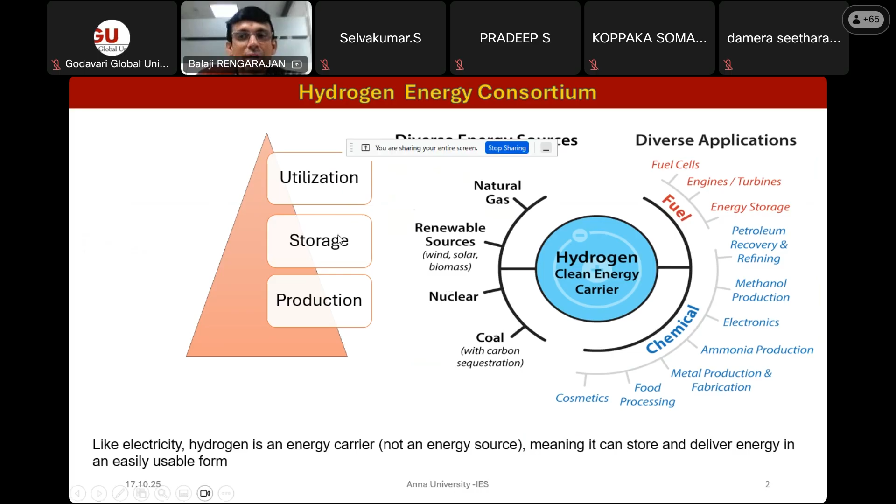Coming to the basic definition of fuel cell - I think most of you are aware of that. As I said, the chemical reaction is 2H2 plus O2, so the combination of hydrogen and oxygen, not directly, but in a controlled manner on the electrode surface. So you can get pure water along with the generation of power.

So it produces electricity through chemical reaction, not through combustion. It operates like a battery, because a battery also produces DC power and a fuel cell also produces DC power. But the main difference is that as long as you feed the fuel cell, it will generate power, whereas in the case of a battery, it's a fixed electric charge stored in the form of materials. Once the material gets exhausted or converted into a different form, the power output will change. Whereas in the case of a fuel cell, as long as you supply fuel, it can generate power through chemical reactions. That is the major difference between a battery and a fuel cell.

So what is a hydrogen fuel cell? Because you can use any fuel, but why do you want to go with hydrogen? Basically, it's an electrochemical cell, and it generates power by reduction of air and oxidation of hydrogen within the cell. There are three important components since it's basically an electrochemical cell - we need to have positive or negative electrodes, that is anode and cathode, and then the electrolyte. These are the three major components of a fuel cell.

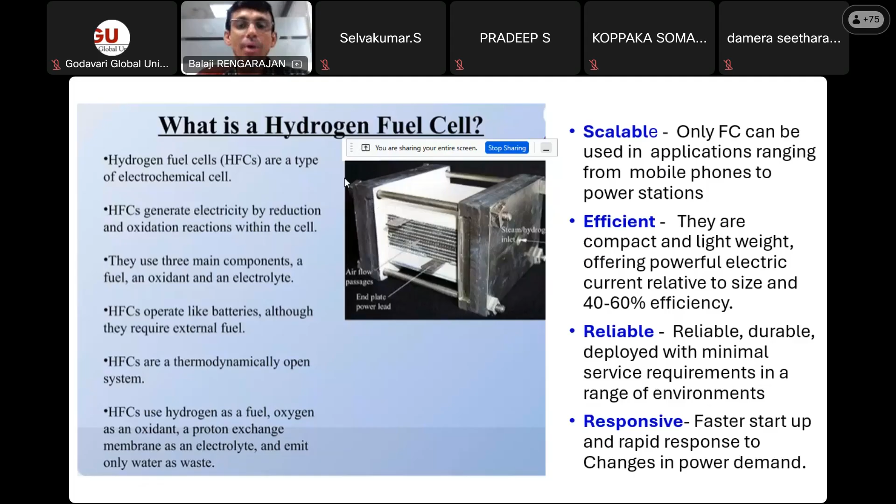The response to electrical signals has to be high when you try to use it for any automobile application. In the case of battery also it's good, and in case of fuel cell also, especially hydrogen fuel cells, it's on par with other energy generation devices. As I said, it's basically an electrochemical cell.

Depending upon the type of electrolyte employed for making a fuel cell, it can be categorized into 5 different types based on the electrolyte used. The second option is based on the type of operation, whether it's low temperature or high temperature operation. In that category also, it can be categorized into 5 different types.

The first one is the proton exchange membrane based fuel cell, which operates at low temperature and can be used for portable to transport applications. In the entire range, we can use it.

In the case of solid oxide fuel cell, because it's a high temperature fuel cell, ion conduction happens through the oxide ion. To carry out conduction of the oxide ion, the material has to be heated to high temperature, so then only the oxide ion conduction will be possible. In this case, the solid oxide fuel cell is operated at high temperature of 1000 degrees Celsius. Because of this high operating temperature, it cannot be used for mobility applications; it can be used only for stationary applications.

Molten carbonate and phosphoric acid salts come under the acid environment, but have medium temperature. They operate less than 1000 degrees Celsius, ranging from 300 to 900 degrees Celsius, and can be used only for generator stationary applications because of the operating temperature range.

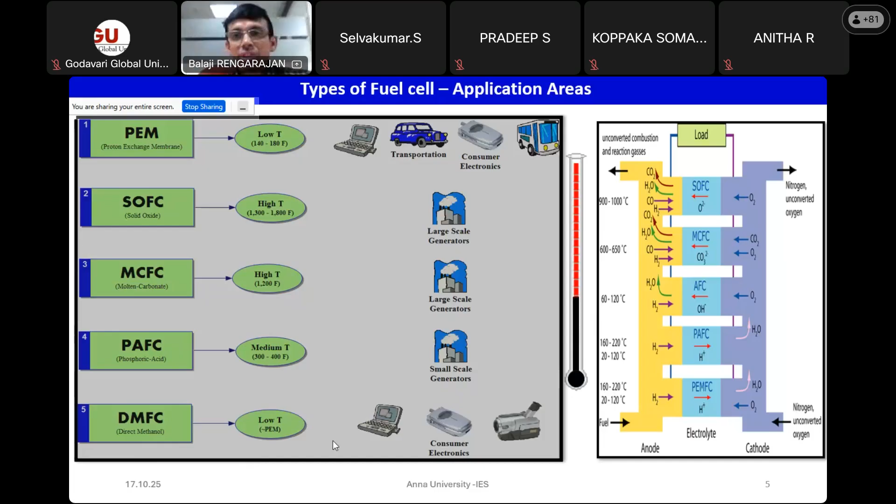The last one is the direct methanol fuel cell, which in situ generates hydrogen from methanol. In a hydrogen fuel cell, you have to pass pure hydrogen gas, whereas in the case of direct methanol fuel cell, you need to use direct methanol as fuel. It can generate hydrogen within the system, and it can also power the system. So this is the direct methanol fuel cell.

Among these 5 fuel cells, why do you want to go with PEM, the proton exchange membrane based fuel cell? The advantage is that it can be scalable, ranging from few watts to megawatt level. That is the advantage, and it can be used both for stationary as well as transport applications, and the operation is at low temperature. Because of these advantages, this polymer electrolyte or proton exchange membrane based fuel cell is gaining importance both for stationary as well as transport applications.

If you see the basic configuration of a fuel cell, you need to have a membrane at the center, and on both sides of the membrane, the catalyst has been coated - one is positive, the other is negative. In order to facilitate the gas at each compartment, you need to have flow channels, which are made on the graphite plate, and this flow channel is determined based on the stoichiometric ratio required for hydrogen and oxygen in the system.

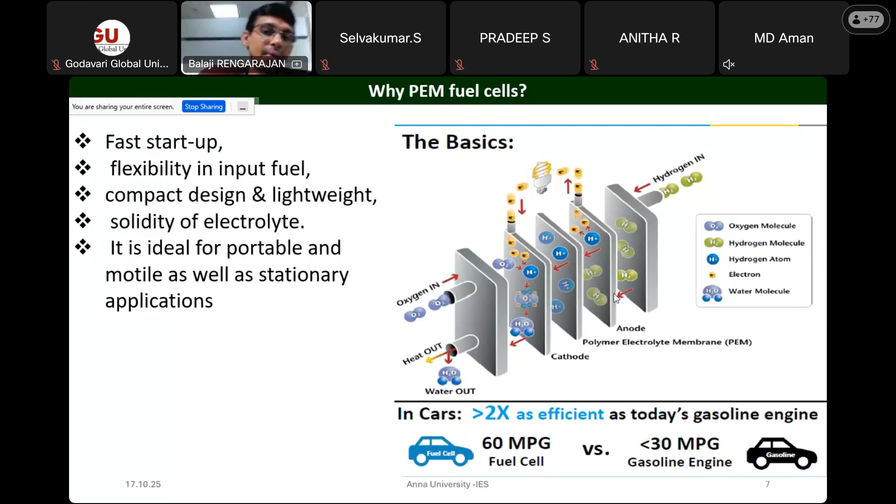This is a typical single PEM fuel cell configuration, and it is lightweight and compactable, because the membrane thickness will be in the range of microns, and you can make a very large stack because this repeating element of membrane and electrodes is very thin, and you can make various modular PEM fuel cells.

Coming to the important components involved in making a proton exchange membrane fuel cell, there are 4 important components. If you see on the right side of the slide, the first is the membrane, called the proton exchange membrane, which is a Teflon backbone based polymer functionalized with the sulfonic acid group. The sulfonic acid group is responsible for proton conduction within the polymer matrix. This is one of the important components in the fuel cell - it acts as an electrolyte-cum-separator.

The next important component is the bipolar plates - actually a separator plate, because this is a graphite based bipolar plate. This graphite has very good electrical conductivity, both in-plane and through-plane conductivity is good, and it has very good thermal conductivity also. Because of these two properties, it is widely used as a bipolar plate for making fuel cell stacks. So on the surface of the bipolar plate, you need to have channels to facilitate the gas molecules in the respective compartment.

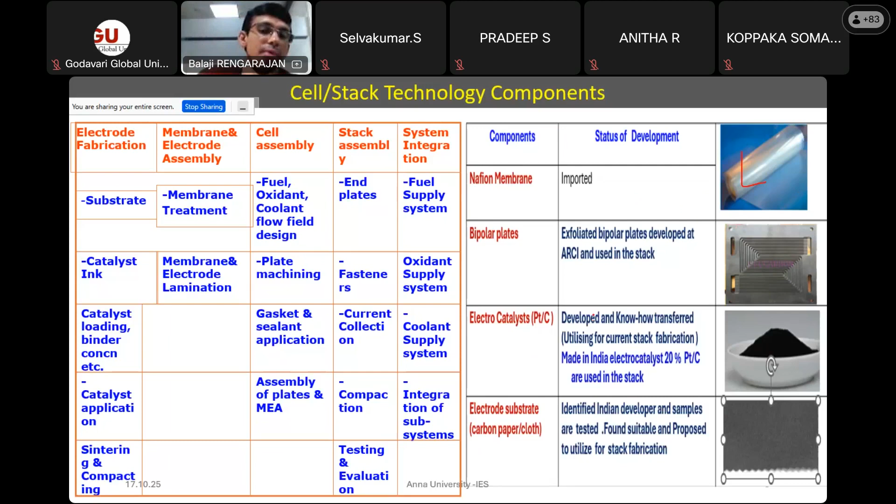So it needs to have hydrophilic and hydrophobic properties, and it should be porous in nature to facilitate the gas molecules. These are the important properties and functions of each component involved in making a PEM fuel cell. If you see these materials, there are four materials.

If you see the thickness of each material, the electrolyte ranges from 20 to 180 microns. It's a very thin polymer film, and over this polymer film the catalyst has been directly coated. This platinum-carbon is directly coated on the membrane on both sides, and you have a carbon substrate, that is carbon cloth or carbon paper, which acts as a gas diffusion medium.

It is completely porous. It will facilitate the gas molecule reaching the cathode and the electrode surface. So in order to facilitate the gas molecules, you need to have a separator plate, that is a graphite plate, the gas distribution plate or gas distribution cathode, called a bipolar plate, ranging from 200 to 700 microns thickness. It's mostly made up of graphite, and it has a desired flow channel to facilitate the gas molecule in the respective compartment.

So these are the four important layers of the PEM fuel cell. And if you want multiple cells, this unit is repeated simultaneously to get the required power from the fuel cell.

Now in terms of the lifetime of the fuel cell, when you want to make a fuel cell and ascertain its life, the various phenomena happening within the fuel cell are most important. These phenomena happen on a time scale of microseconds to months. Each phenomenon will decide the life of the fuel cell.

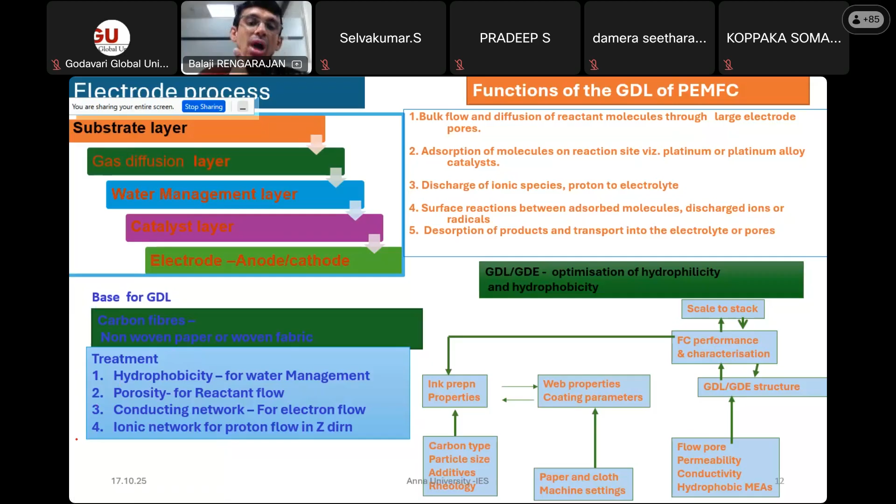Another important component is the membrane. There is a proton exchange membrane, basically a Teflon polymer, polytetrafluoroethylene (PTFE). That is a Teflon-based polymer backbone functionalized with sulfonic acid groups, which allows proton ion conduction between the two positive and negative electrodes.

The main property of this membrane is that it should be highly mechanically stable. Though the thickness is in the micron range, it should still be mechanically stable. Otherwise, if any pinhole formation happens within the membrane, it would allow hydrogen and oxygen molecules to directly combine. So it should be highly mechanically stable, and in terms of thermal stability, it should be stable up to 100 degrees Celsius, both physically and thermally.

In terms of conductivity, it should have zero electronic conductivity — it should not allow electrons to pass through the membrane. But at the same time, it should be highly ionic conductive because proton conduction has to take place through the membrane.

And then low gas permeability, because you are handling two different gases in two compartments, it should be completely free from gas permeation — not allowing any gas to pass to either side of the membrane. In terms of long-term stability, it should be highly stable because the proton conduction should always be stable; only then can you get stable performance over a period of time.

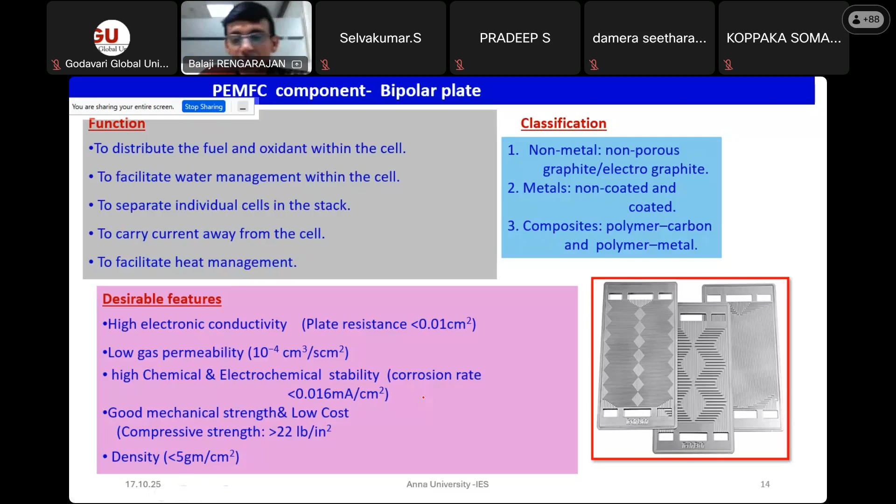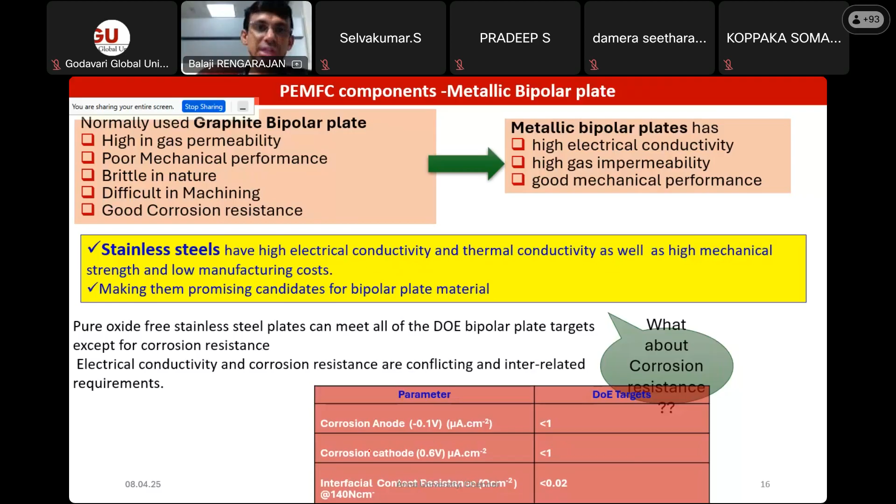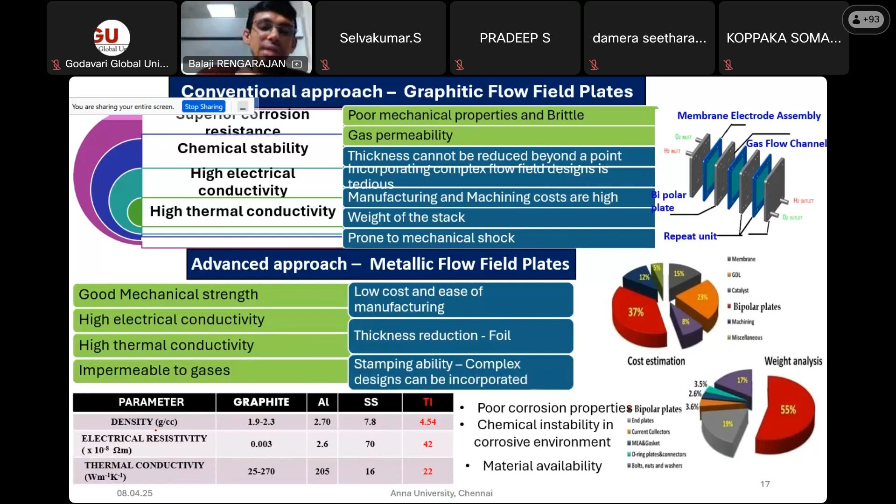Conventionally graphite was used, but now people are trying to use metallic flow field plates with desired properties of electrical and thermal conductivity, and the corrosion property has to be minimum.

But even if you use a very thin plate, the challenge is how you can make a desired flow channel. When you employ a very thin metal plate, like 1mm or less than 0.1mm or 0.2mm, you cannot do conventional milling over the metallic plate - it creates a lot of bending, and ultimately you will not get planarity on the plate to make an entire PEM stack.

So there are various strategies to make a desired flow channel on the metallic plate, ranging from conventional stamping - you have a die with the desired flow channel and do hydraulic stamping to get the desired flow channel on the plate - or hydroforming, which is also an industrially proven technology to make a desired channel on the plate.

Additive manufacturing, like 3D printing, can also be employed for making a desired flow channel. Chemical etching involves proper masking on the plate, then chemically etching only the unmasked area with a desired flow channel - this is also one way of making the metallic bipolar plate. And conventional milling, which is an energy-intensive and time-consuming process.

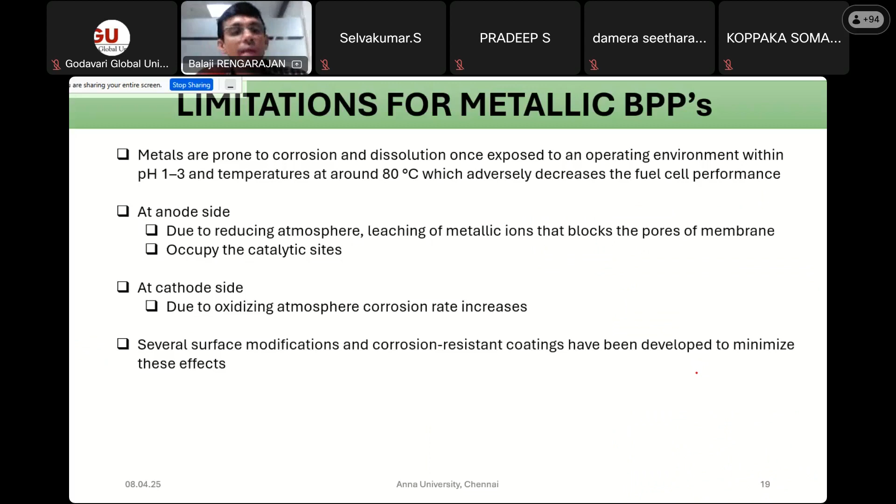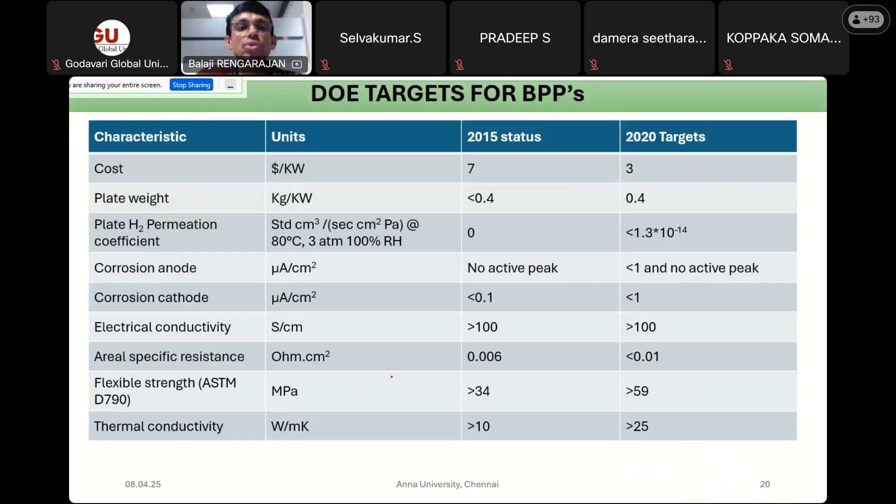So as I said, one limitation of metallic plates is undergoing corrosion - we need a proper coating to avoid corrosion in the acidic environment. These are the various target values of metallic bipolar plates in terms of cost, weight, and corrosion properties, and I can share these slides so you can go through the target values if you want to employ them in a fuel cell.

Especially stainless steel, as I said, is widely used as a metallic bipolar plate in fuel cells with a proper protective coating. That protective coating is adopted through various deposition methods like physical vapor deposition, arc ion plating, thermal nitridation, or sol-gel. Various coating methodologies have been adopted to make a desired coating over the SS to protect the base material from corrosion.

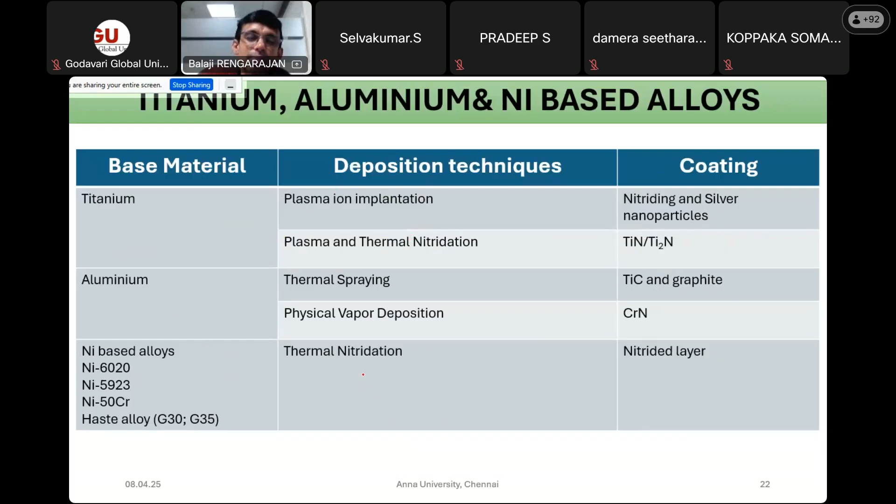Titanium, aluminum, or nickel-based alloys can also be used as base material, but these are not widely considered because of cost, and there are technical challenges with aluminum when you want to employ it in a fuel cell - its corrosion stability is not as great as SS. So SS-based metallic bipolar plates are widely used for fuel cell applications.

So coming to the various phenomena happening within the fuel cell, apart from the component level we discussed, the next aspect is the kind of phenomena - what is happening within the fuel cell. So the first step is water management.

The membrane and the conduction of protons will be effective only if the membrane is fully hydrated. Water is always being produced at the cathode compartment. But if you don't properly eliminate the water from the cell, it creates flooding at the cathode side, and it will not allow fresh hydrogen or air molecules to reach the catalyst surface. So you have to take out the water as soon as it gets produced within the cell, and you need proper water management within the cell.

To have proper water management within the cell, you have to make hydrophilic and hydrophobic coatings over the component surfaces, so that you can maintain some water within the system to keep the membrane always hydrated. But at the same time, 90% of the water produced from the cell has to be evacuated. So you need proper water management to have a stable and reliable performance over time of the fuel cell.

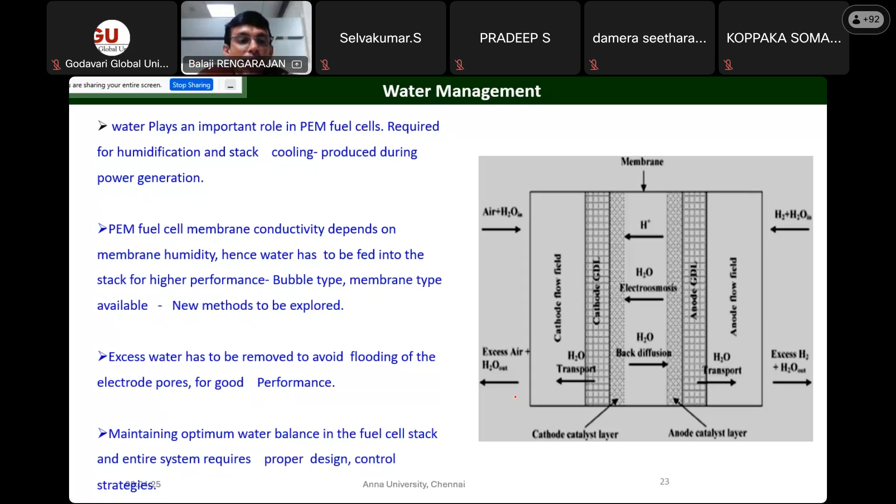Regarding thermal management: for example, if you develop a 1 kilowatt fuel cell delivering 1 kilowatt of electrical power, it is also producing 1 kilowatt of heat, because the open circuit voltage is 1. The moment you draw the load, the voltage comes down. If you operate at 0.5 or 0.6 volts, the efficiency is close to 50 to 60%, so the remaining 40% of the energy is converted into heat energy. So heat is also produced during the operation of the fuel cell.

So as I said, 50% of the energy comes out as heat, and 50% comes out as electrical power. This heat has to be managed properly with a proper cooling mechanism.

Normally, in a PEM fuel cell stack, people introduce a coolant plate with a desired flow channel in between the cells. For example, in between 3 to 4 cells or 2 to 3 cells, they introduce a coolant plate with a desired flow channel, which facilitates water or air as the coolant, and it carries the produced heat away from the fuel cell.

When you want an effective thermal management system, a closed loop cooling mechanism is preferred. You need a proper radiator with a closed loop mechanism, and you can effectively maintain the PEM fuel cell stack at a desired temperature of 50 to 70 degrees Celsius.

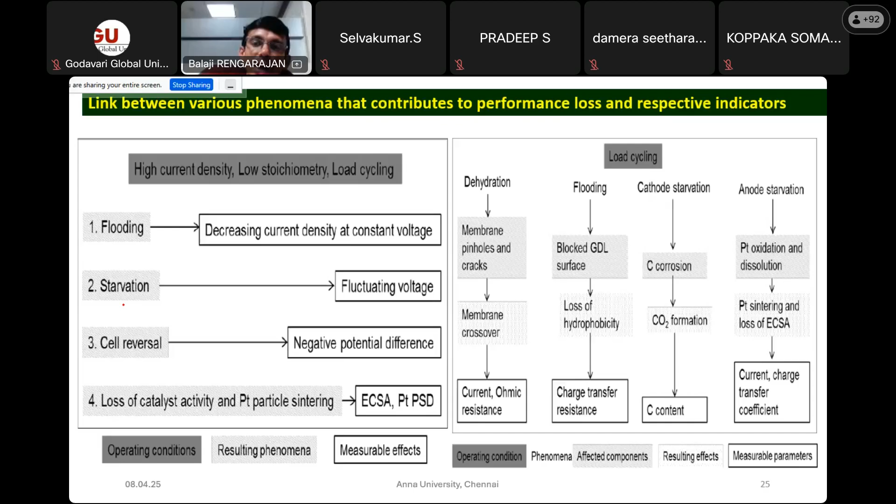Finally, the loss of catalyst activity over a period of time. How do we lose catalyst activity? Because we use very nanomaterials and micron range materials, over a period of time these nanomaterials can combine together and form a bulk material. If bulk material forms, then obviously the electrochemical active surface area will come down, so overall catalyst activity will also come down. So all these four phenomena result in lower performance over the long run.

Coming to the power converter aspect, because fuel cell will produce DC power, when you want to convert it into AC you normally need to introduce a power conditioner, so you introduce converters and inverters. And when you want to call it a PEM fuel cell system, it not only means the fuel cell, it also represents the air supply system, fuel supply system, power conditioner, and the entire control and monitoring system. All together is essential if you want to make a PEM fuel cell system.

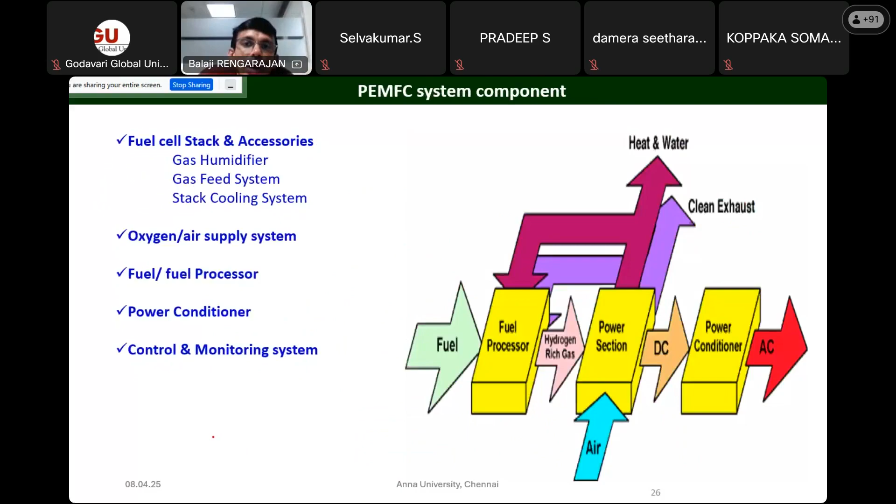In terms of power management, the critical aspect of the fuel cell is that though it is a DC power producing device like a battery, it is entirely different from the battery. The power electronics are entirely different, because for the battery, the power electronics required is to meet the operation of high voltage and low current, whereas in the case of fuel cell, you need power controllers and power electronics that can handle high current and low voltage.

Each fuel cell will produce 1 volt as open circuit voltage. The moment you draw current, in 1 centimeter squared area you can draw maximum of 1 to 2 amps, and this 1 to 2 amps has to be handled at 0.5 to 0.6 volt, a very low voltage. If you have 100 cells in series, the voltage multiple is close to 50 to 60 volts, but the current, if you have 100 or 300 centimeter squared area, you need to handle 50 volts at 300 amps or something like that.

So you need to be in a position to develop power electronics which can handle high current at low voltage, not high voltage and low current. The power electronics is also playing a major role in getting stable power from the fuel cell.

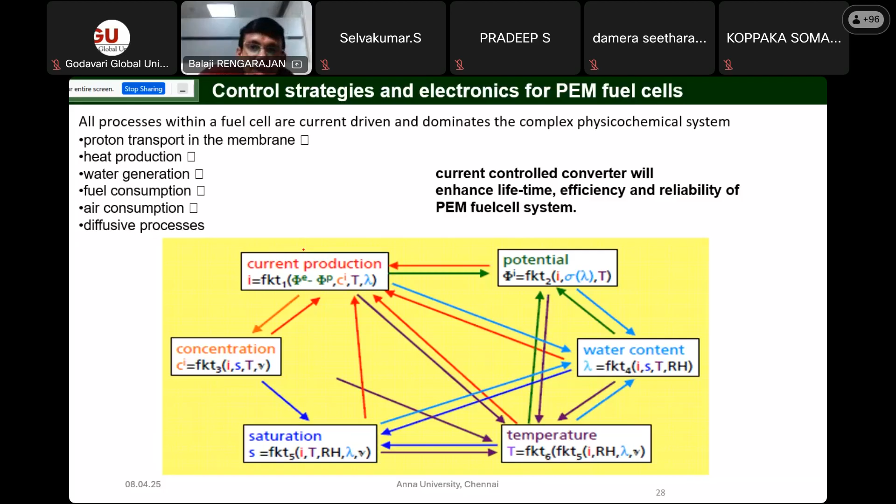And we start to make a component like a catalyst coated membrane and membrane electrode assembly and bipolar plates. We make a component from the raw material, commercial raw materials, and we make a short stack and full stack.

Once the stack is ready, we develop the balance of system - air supply, fuel supply system, thermal management, power management, coolant management. We integrate all this with the fuel cell stack to make a product that has been employed for various field trials. That is one pathway mechanism.

The second parallel pathway is that we develop our own materials, not commercial raw materials, and evaluate them at a common level. Once successful, we make a small single cell and compare its performance with commercial materials. If it's on par with the commercial membrane, we scale up our R&D activities to the system level. This is our two-way pathway mechanism for technological development.

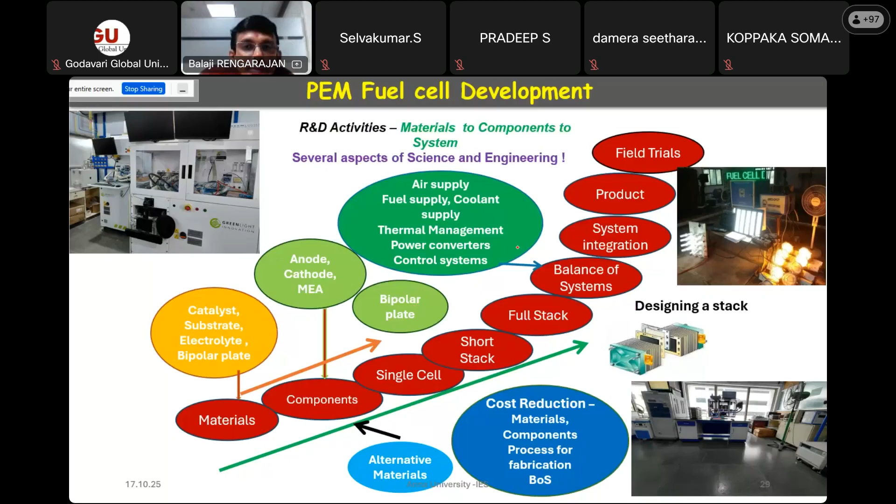This is our journey of developing various fuel cell complete grid-independent power supply systems, ranging from 1 kilowatt to 20 kilowatt capacity, with all the required balance of system, over a period of time.

Whatever system we develop, we normally employ it wherever hydrogen is available. We put up our hydrogen system there and monitor the actual performance of the fuel cell system we develop.

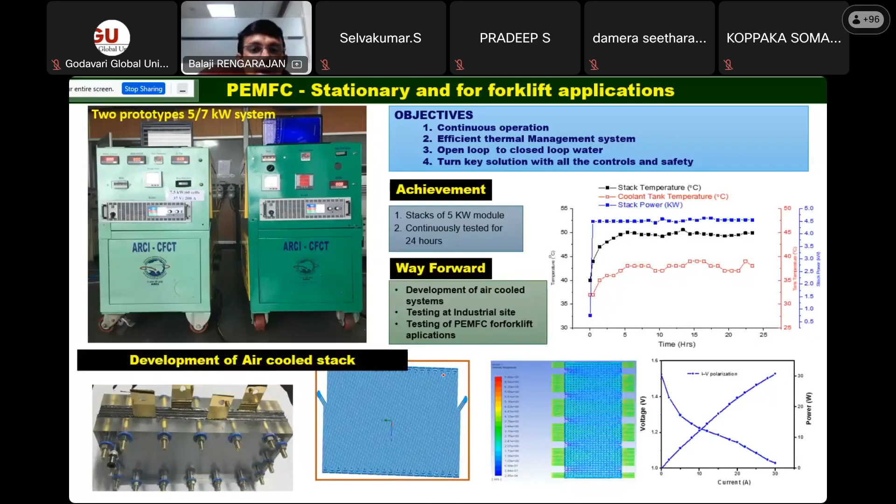Apart from that, we tried to demonstrate a kind of hydrogen truck, where a diesel truck is converted to have an inbuilt PEM fuel cell system along with hydrogen gas cylinders. So we have hydrogen gas cylinders and a fuel cell in the vehicle.

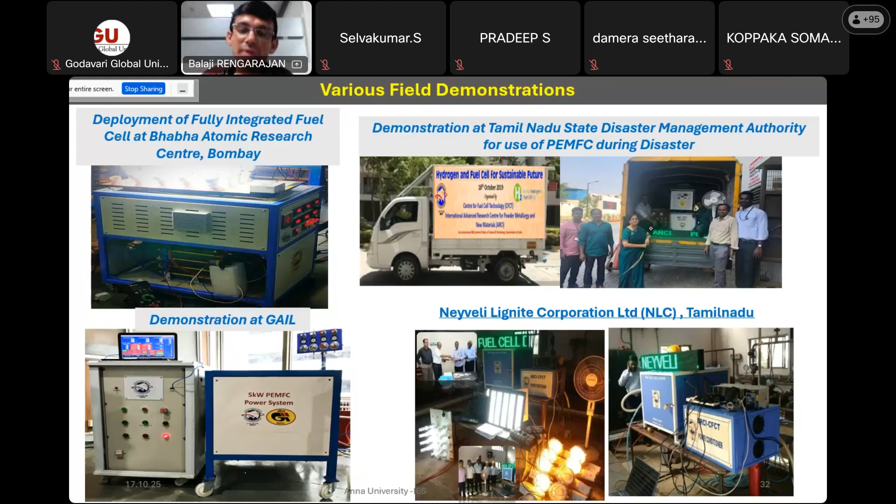Whenever disaster management is needed, such as floods, and immediate power is required, this truck can power and meet the required power demand. As a proof of concept with the Tamil Nadu government, we did a disaster management demonstration with our 5 kilowatt fuel cell system, which can power a maximum of 5 to 7 kilowatts to meet the immediate power demand.

Apart from stationary applications, nowadays PEM fuel cells are being considered for power backup applications for telecom towers, because telecom towers mostly depend on the grid. When the grid fails, they need a mechanism to handle that failure, and diesel gensets are normally employed in various telecom towers. But government regulations are pushing them toward the non-carbon route, that is the fuel cell route.

So we approached an Airtel telecom tower in Pune and demonstrated our fuel cell system as a backup power application whenever grid power fails. Our PEM fuel cell will power the telecom tower in the absence of grid power. That was a decent demonstration, and many telecom tower operators are looking for alternative backup power applications.

So hydrogen fuel cells are also one of the power backup application options, and many data centers are also looking for immediate application of fuel cells for telecom towers as a stationary backup power application.

As I said, when you want to make a fuel cell stack, it requires starting from materials - the material has to be processed, assembled, and delivered as a fuel cell stack. The entire process involves about 45 steps to make a fuel cell stack. Earlier we automated about 30% of these process steps. Now we try to maximize automation in fuel cell component as well as stack fabrication steps.

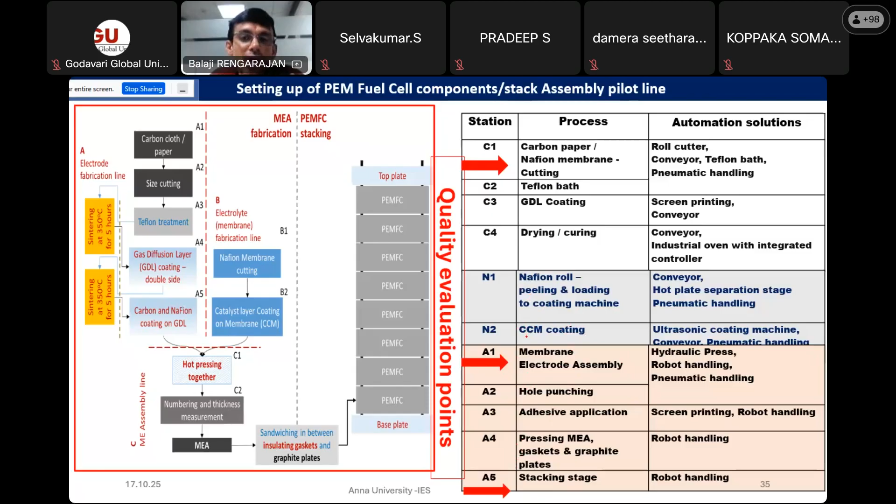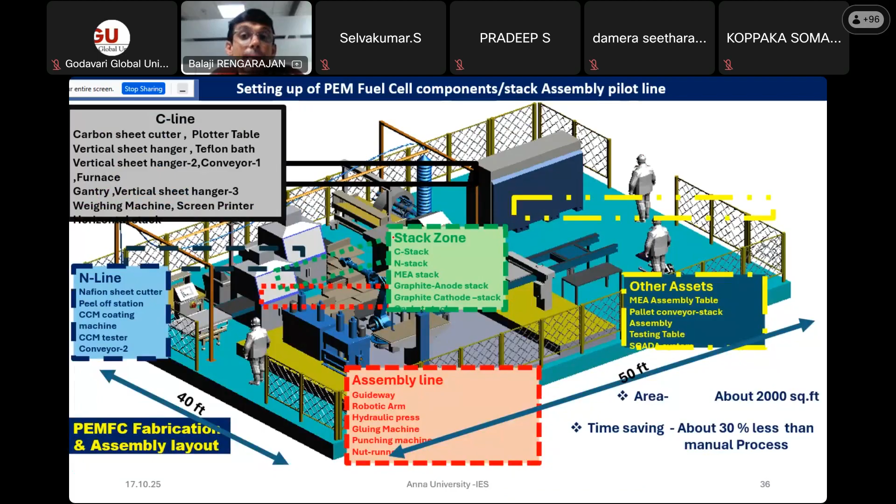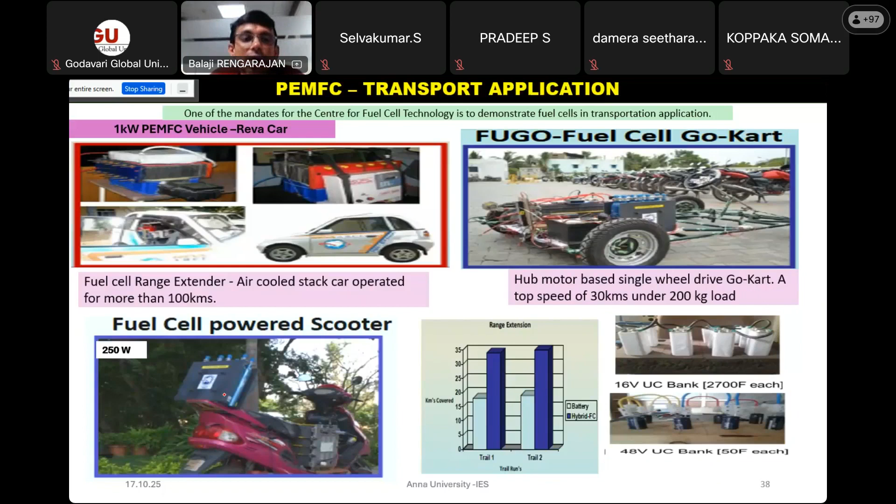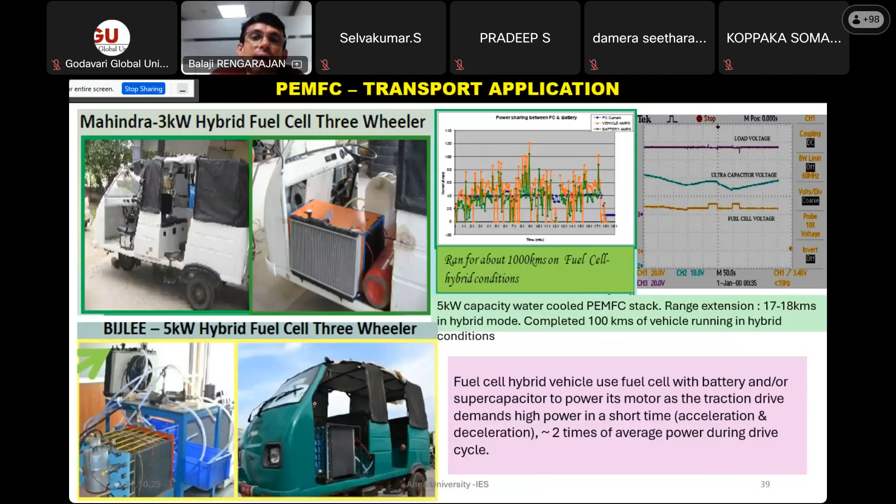Coming to stationary applications, and apart from stationary, in terms of transport applications, whatever stack we fabricated within our lab, we tried to integrate with a battery as a kind of range extender. So we did a demonstration for the two-wheeler as well as go-kart, and for the four-wheeler also, with a battery as a range extender. We did a lot of trials in our premises, and it shows the feasibility of integrating with the battery, which can also be used as hybrid vehicles with our own fuel cell.

Apart from converting hydrogen into power through a fuel cell, an ICE engine can also be used to convert hydrogen to power. But the challenge is that the air fuel ratio is more with hydrogen gas, since it occupies more volume in the combustion zone, and there may be a possibility for NOx emissions, which is higher than fossil fuel based engines. So we need to take care of NOx emissions when employing a hydrogen ICE engine, and the efficiency is not on par with the fuel cell. It's low efficiency, close to 25 to 30%, not the 40 to 50% we are getting in fuel cells.

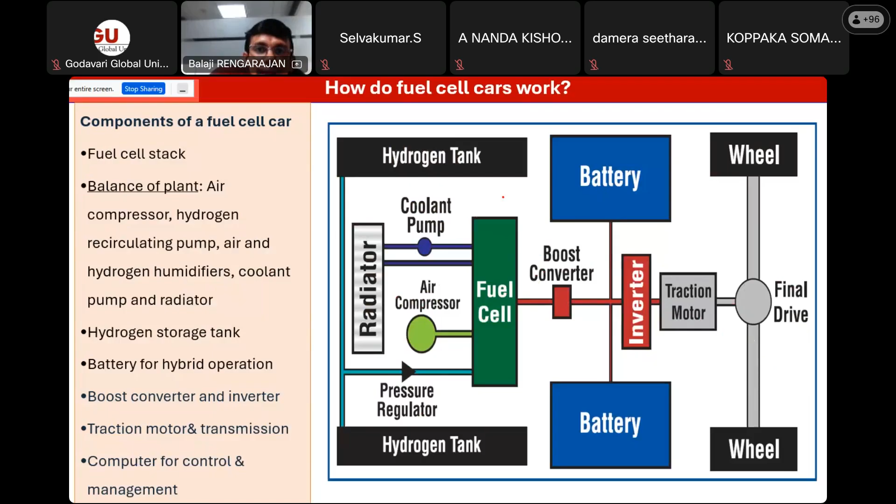Normally the fuel cell car works in such a way that you will have a battery backup to get stable power out of the fuel cell, and you have a boost converter because the fuel cell and inverters power the traction motors, which take care of the final drive through the wheel. This is the typical mechanism of how fuel cell cars work.

In fuel cell hybrid vehicles, there are two different types of hybrids, series and parallel. In series hybrid vehicles, the fuel cell part is small, with a large battery bank. So mostly the battery drives the motor at all times, and the fuel cell operates continuously, keeping the battery always charging. In this case, the fuel cell is not load following; the battery is the load following component, but the fuel cell supports the battery. That is called series hybrid.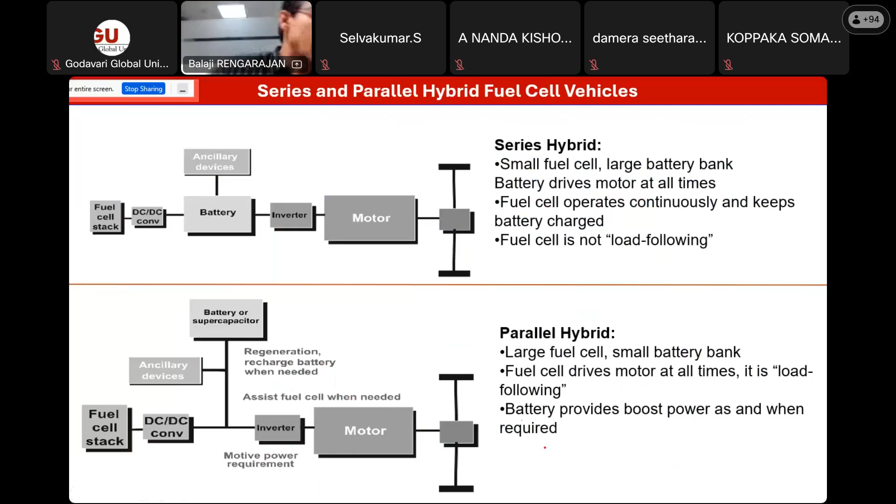In parallel hybrid, the fuel cell controls the motor and follows the load, not the battery. The battery size is small and the fuel cell size is high. The fuel cell drives the motor at all times; it's load following, not the battery. The battery provides boost power whenever there's a surge in current or voltage through the fuel cell, providing booster power as and when required to power the motor. These are the two different kinds of fuel cell hybrid vehicles normally employed for commercial applications.

When you want to have a fuel cell hydrogen electric vehicle on the road, the major requirement is that it should be cost competitive. The fuel cell system alone must allow a sustained speed of a maximum of 160 kilometers per hour, and with the assist of electronic supporting systems and fuel cell control systems, it should allow 0 to 95 kilometers per hour speed in 10 seconds.

As I said, the battery, the motor, the control thermal management system, the radiators, and power electronic controllers are most important.

The fuel filler is also most important, it's a nozzle which is also one of the costly components in the dispensing station. So the nozzle from the high pressure dispenser which is attached to the respective filling tank on the vehicle. The nozzle needs to handle high pressure to low pressure dispensing.

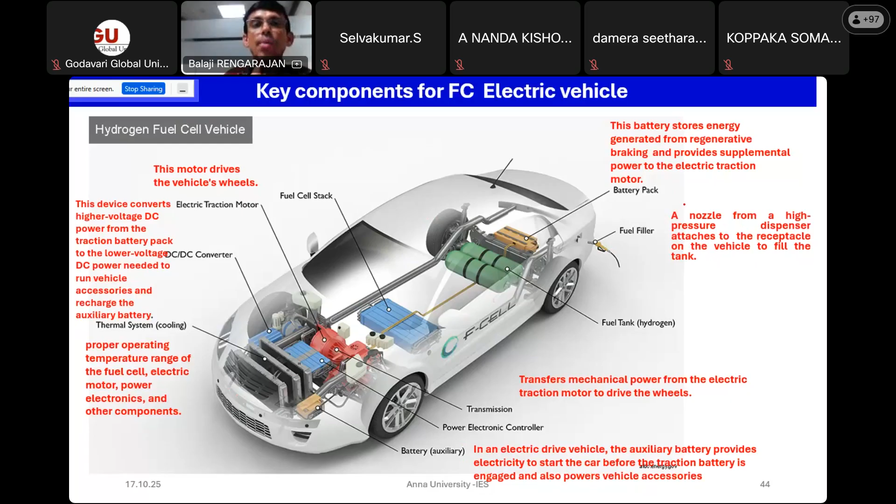And the battery stores energy which is generated from the regenerative braking system and provides supplemental power to the electrical traction motors when required. So these are the key components involved in fuel cell electric vehicles.

Various automobile manufacturers have already developed and demonstrated, and commercially the fuel cell hydrogen electric vehicles are there. Honda and Toyota are the leading automobile manufacturers, so they have already deployed this hydrogen fuel cell vehicle.

Especially I could experience this Toyota Mirai when I was in Canada. It's a good vehicle, and it has 700 bar hydrogen pressure cylinders on board, so that meets out the entire range of the fuel cell electric vehicles.

Most of these electric vehicles are operating at high fuel cell power and low battery power. You can see on top of the photo, the range of the fuel cell which is placed on the front of the vehicle. So it is about 120 to 130 kilowatt fuel cell.

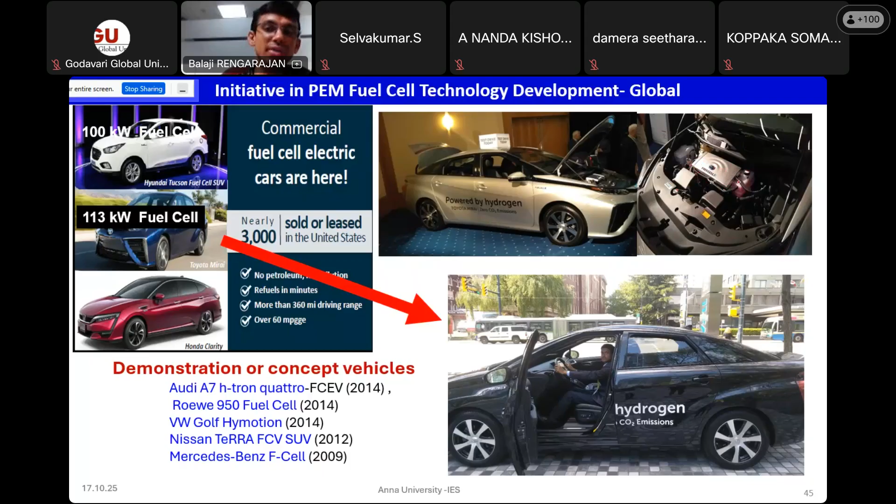It's so compact, made up of metallic bipolar plates, what we discussed. So it occupies less volume and less weight, and it can deliver up to 120 to 130 kilowatts of power, which is required for this vehicle.

In terms of battery vehicles, when we try to compare battery electric vehicle and fuel cell electric vehicles, there are three important parameters which we need to consider. One is price, range, and time to refuel. So these are the three important parameters normally people use to compare battery and fuel cell electric vehicles.

In the case of hydrogen fuel cell vehicles, in terms of time to refuel, it is on par with fossil fuel based vehicles. In terms of charging, electric vehicles require higher charging times ranging from half an hour to 12 hours depending on the battery type.

In terms of range also, it is on par with fossil fuel, so we can cover 300 to 400 kilometers like a petrol and diesel engine. In terms of price, right now it is costly because of the low volume, but over a period of time, it can also meet out the electric vehicle charger cost, which is normally used for the lithium ion battery based electric vehicle.

So though demonstrations and pilot studies have been carried out, and even commercial vehicles we could find out, if you want to have deeper penetration at market level, there are some key challenges still need to be addressed.

The main one is the cost of the fuel cell. Right now it is slightly higher because of the low volume, so people are trying to reduce the cost to about $30 per kilowatt. If it can meet out that cost demand, then the market penetration will be much faster.

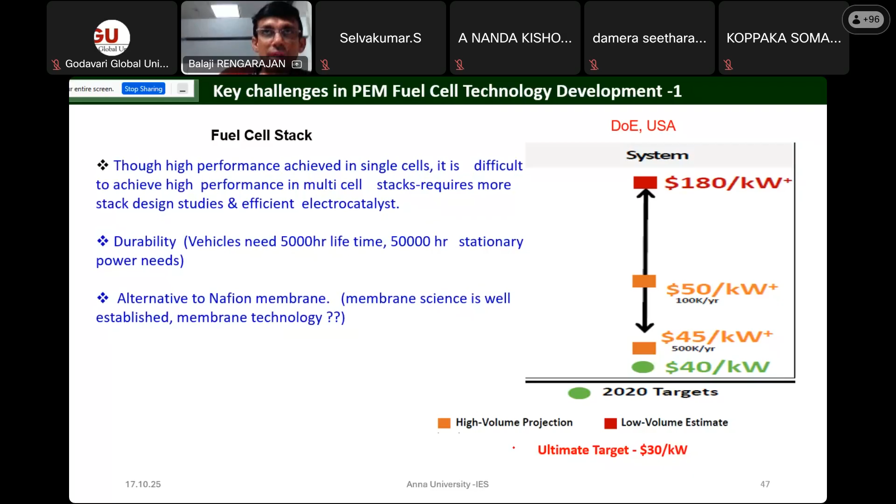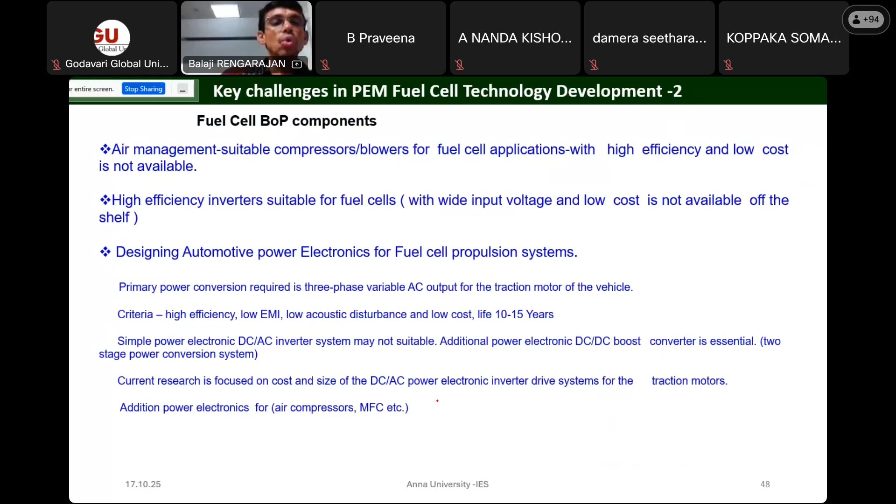So as I said, we are also developing a balance of plant, because we need a very compact, high energy efficient air supply system, thermal management system, radiator system, and power converters. These are all essential BOP components apart from the stack. And the cost of the BOP components is also slightly higher right now, because we don't have such kind of infrastructure in India to make very precise and high energy efficient BOP components required for the fuel cell.

So once that comes, obviously the cost of the entire system will also come down. And finally, the fuel infrastructure, which is also key important, because even if you have a fuel cell vehicle, if you don't have a charging station, it is not possible to realize the hydrogen fuel cell vehicle on the road. So creating a fuel infrastructure is also equally important. There is a lot of momentum right now being taken by our government to create a model or demonstration of a hydrogen dispensing station, and recently it has been launched in Ladakh. So we have a hydrogen filling station, slowly it is coming up. Once the fuel infrastructure is created, obviously the fuel cell vehicles we can see on the road.

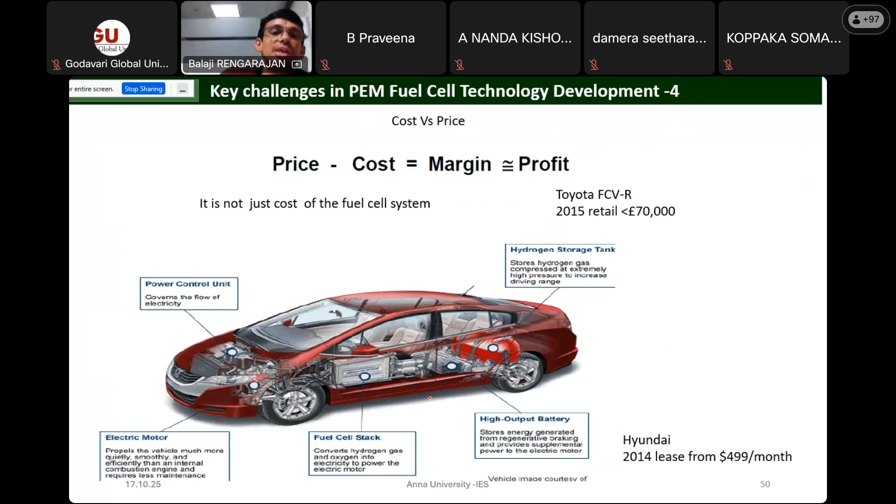But obviously for any new technology, there is a drive, a competition between cost and price. So for any new technology, if you want to implement it in commercial applications, we need to compromise on the margin so that the technology penetration to the market will be easier. So the price has to be reduced considering a low margin. And with that, I stop here, and I am open for further discussion.

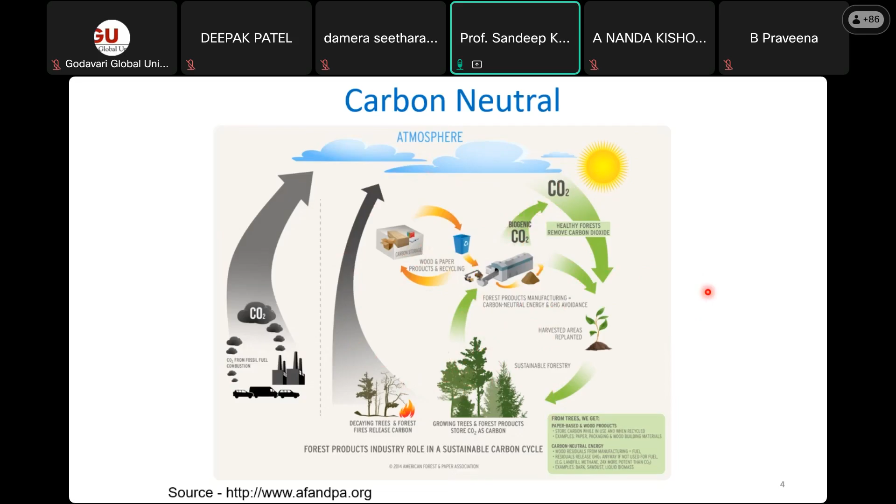So when we look into waste-to-energy technology or biomass energy systems, it is actually the biomass which has captured the CO2. It will again release back CO2, but within that we are trying to capture some useful energy and product out of it. That's why this is called biogenic CO2 - it is nothing but a carbon neutral system, where the same amount of CO2 which was captured by the biomass, we are just releasing that, not more.

So basically, when we look into hydrogen, biomass typically contains around 55 to 65 grams of hydrogen in its organic molecule per kg of biomass on a dry basis. It is not much, but the molecular mass of hydrogen is low, that's why the overall mass is low. But volume fraction wise, the amount of hydrogen that we have in our biomass, in our body, is significant.

Now coming to biomass potential - when we say renewable energy, sustainable and non-sustainable, there are various ways we can actually get biomass potential. One is agro-industrial waste, coming from paper mills, waste molasses from sugar industry, food processing industry, textile and all. Then we have agriculture waste, which traditionally used to be fuel or fodder, but slowly has become waste where farmers are burning it in the fields to get rid of it. If that agriculture waste, which is biomass, can be used for energy generation, then that is also sustainable.

Same thing about municipal solid waste, typically coming from our kitchen - biodegradable waste such as food and kitchen waste, green waste, paper, inert materials like fabrics and cloths, which has an origin from biomass. Then another sustainable category is forest waste - logs, chips, barks, leaves and all, which are actual forest waste, or even garden waste. You can relate it to your college campus and all.

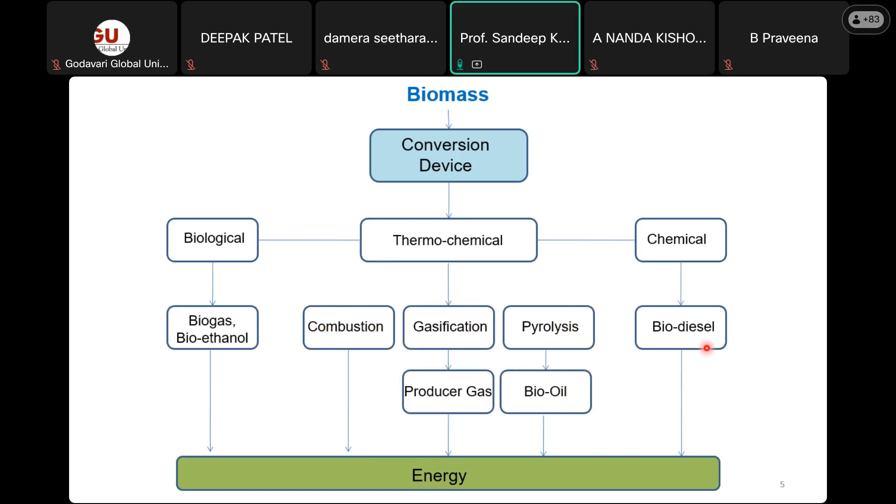Combustion directly gives us energy, and two other processes, gasification and pyrolysis, give us intermediate fuel, just like bioethanol, biogas, or biodiesel. These are intermediate fuels, which actually produce producer gas, hydrogen and carbon monoxide. Our topic for discussion today will be this gasification pathway, and then pyrolysis, which gives us bio-oil. So we will discuss thermochemical conversion, and then try to understand that combustion, gasification, and pyrolysis are not very different processes altogether, but very much interlinked. To understand gasification, we have to understand combustion and pyrolysis as well. Now coming to different technology, every technology is not very suitable for every type of feedstock.

If we look into any biomass, most of it has cellulose, hemicellulose, and lignin as the major components. Typically when we associate with food for human consumption, simple sugars, carbohydrates, protein, and fat actually fall into only 5 to 13% of the category, which is the fruit. But when you look into a whole tree, fruits like mango or apples make only a small fraction of the overall mass of the tree body. Within that tree body, the majority of the component is cellulose, which gives sugar, hemicellulose, which are higher polymers of pentose sugar, and lignin, a phenyl propyl based polymer which gives strength to trees and plants. So they constitute the major part of the biomass.

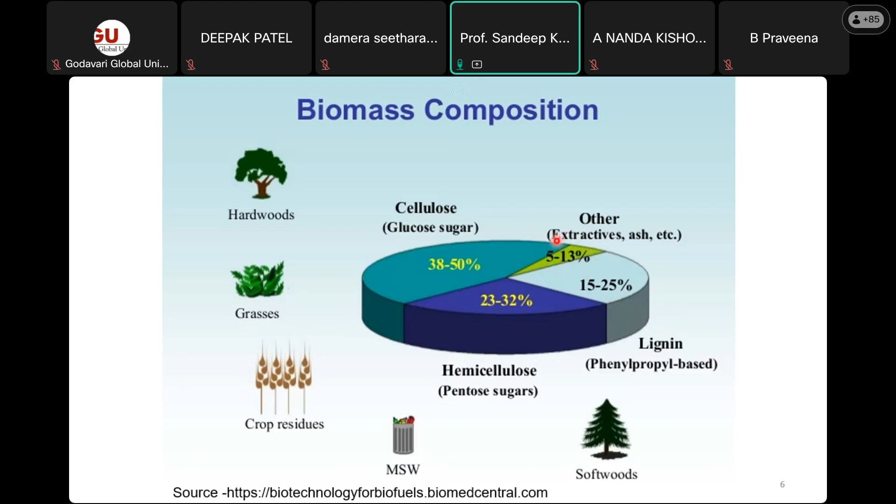When we look into different pathways, biological biogas requires bacteria that typically work only on cellulose, so they eat cellulose and convert it to biogas. Bioethanol works on simple sugars like glucose and pentose sugar, which fall in that 5 to 13% category. You have to supply them simple sugary juice like sugarcane juice or fruit juices, then only they will convert it to ethanol. Biodiesel works only on fat, oil, or fatty acid, also part of that 5 to 13% component. So processes like biodiesel, which is chemical, and biomethane and bioethanol, which are biological, are very much restrictive to the type of biomass they can act on. They are not very flexible in terms of feedstock.

Then comes the thermochemical pathway, which includes combustion, gasification, or pyrolysis. In combustion, we can use any biomass with low moisture content. Anything that is dry can be burned, whether simple wood or dry leaves. Dry leaves are rich in cellulose and hemicellulose, they will burn. Woody biomass like tree trunks and branches are rich in lignin, they will also burn. Even the simple oil we use during Diwali or pujas, which is fat or fatty acids, also burns. It doesn't matter, you can even take rice or dry wheat and put it in fire, it will burn. So basically any biomass having carbon and hydrogen, which makes the fuel, can undergo thermochemical conversion. Combustion, or thermochemical conversion, is the most flexible pathway in bioenergy systems, where the only limitation is moisture content.

Now coming to thermochemical conversion, combustion involves complete oxidation of biomass fuel to CO2 and H2O, with the remaining as ash, which are inorganic solids. In our own body we have blood, so we have iron in it, we have bones, so a lot of calcium. All our body parts have salt running through them, so we have sodium, chlorine, and sulfur in our DNA. All these things which are not fuel, like sodium, nitrogen in protein, iron, and so on, make up the ash, which doesn't burn or oxidize to give energy, but remains as powdery ash or solid residue at the end of combustion.

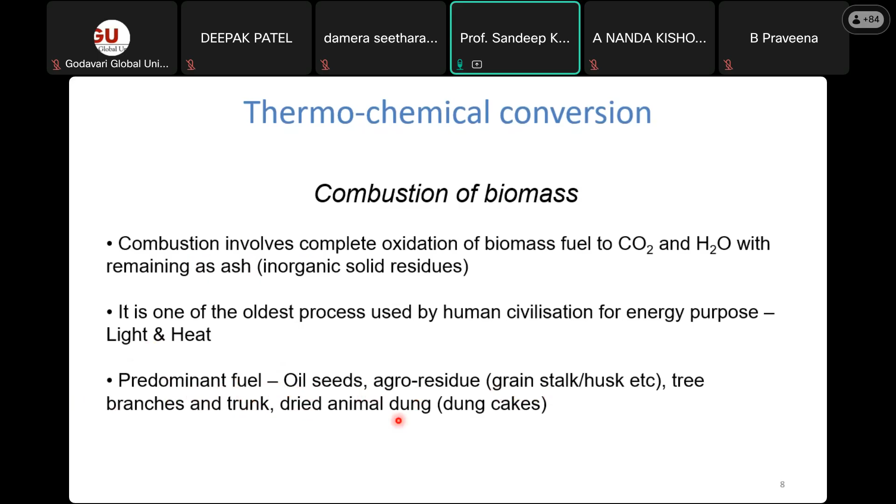Combustion is one of the oldest processes used by human civilization, especially for energy purposes like light and heat, as well as safety and security from forest animals. The predominant fuel can be any type of biomass, whether oil seeds, agro residue, tree branches, trunk, or dry animal dung cakes. All these things can be burned reasonably well if they are reasonably dry.

But now the question comes, from where this gas is coming. Now this gas is coming from the process called pyrolysis. So as the name suggests, pyrolysis means heat which breaks down the organic molecules.

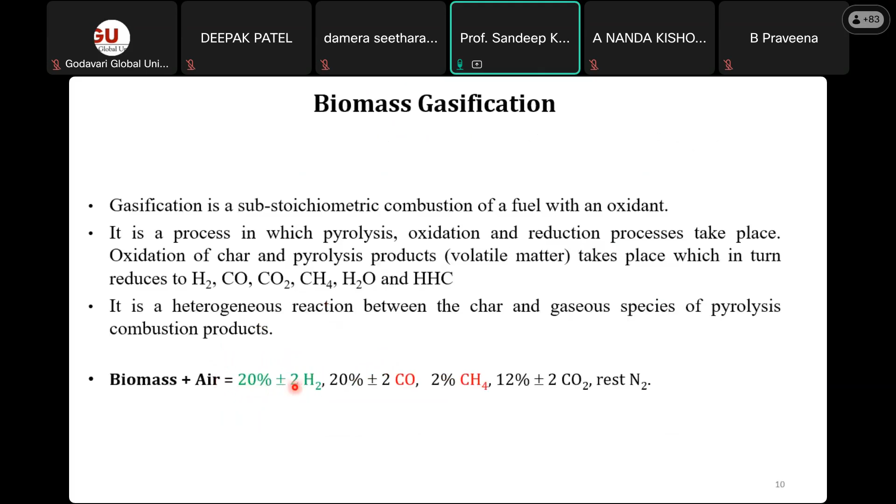So in this process, what happens is, we don't let this carbon get oxidized. What we do is we use this carbon as a reducing agent to give us this fuel, which is hydrogen and carbon monoxide. So typically what happens is, when we heat biomass, it undergoes pyrolysis, gives us volatiles, which is a mixture of many higher hydrocarbons, carbon dioxide, H2, CO and all.

And then it also gives 20 to 30% by weight charcoal, which is mostly carbon, and also ash will be entrapped into that. So in gasification, what we do is we only let these volatiles get oxidized to H2O and CO2. We supply oxygen or air only for that.

And then the role of charcoal is, charcoal then reduces this H2O and CO2. So the reduction process happens: charcoal, which is carbon, reacts with H2O to reduce to carbon monoxide and hydrogen, and charcoal reduces carbon dioxide to 2 moles of carbon monoxide.

So here the charcoal acts like a reducing agent, which gives us this fuel gas, which is carbon monoxide and hydrogen. And here comes the process of gasification, where we say that whatever the solid fuel, that is biomass, is getting converted into gaseous fuel, which is rich in carbon monoxide and hydrogen.

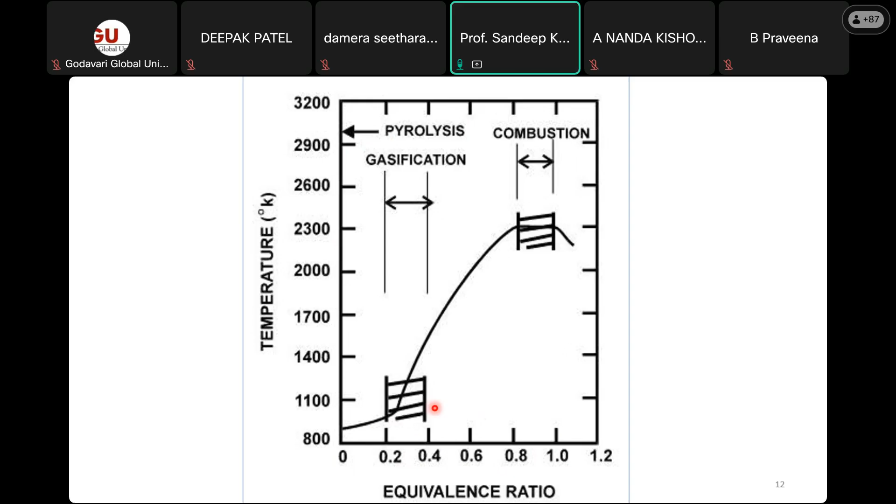If you want to understand how this process happens together, it is very difficult to visualize, but with this simple figure we can understand. When we supply heat, once the temperature is roughly more than 100 degrees, the drying process starts, where all the moisture from the biomass starts coming out. When the temperature goes beyond 200 degrees, hemicellulose starts degrading. Around 220 to 250 degrees, cellulose also starts degrading, as the organic molecules start breaking down, and lignin starts degrading at around 400 degrees. So at more than 200 degrees, pyrolysis or the breaking down of organic molecules starts, and it gives us charcoal and the tar or tarry gas, the volatiles.

When we supply air or oxygen, this charcoal and tar are exposed to oxygen, and the temperature is also high, more than the ignition temperature. So both the charcoal and the tarry gas can undergo combustion because both are fuel. But what favors combustion is the tarry gas. The simple reason is that charcoal oxidation is very, very slow. You can imagine that when you burn wood, in maybe 15-20 minutes all the flame will go off, but the charcoal will still be simmering for another half an hour or so, even though the charcoal is only 20 to 30% of the weight. Basically, it's a solid-to-gas reaction, where solid carbon reacts with gaseous oxygen, and this reaction process is very, very slow.

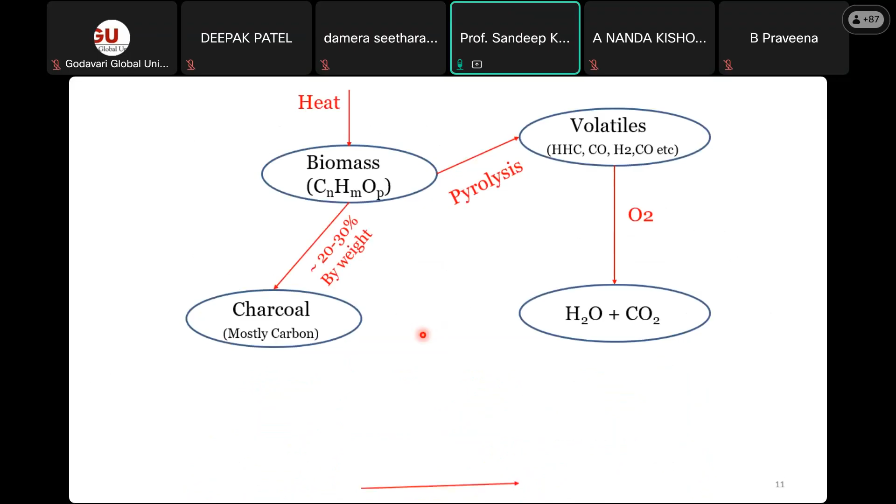So if a limited amount of oxygen is available, most of the gaseous fuel, the tarry gas, will consume the oxygen. There won't be any oxygen available for the charcoal to get oxidized, even though they are present in the same place. So the chemistry favors oxidation of the tarry gas, and the charcoal remains unreacted. We get the products of combustion of the tarry gas, that is H2O and CO2. Then the reduction process happens, where the CO2 and H2O react with the residual charcoal, which is hot because it requires energy. The temperature is high because of the combustion of these volatiles or tarry gas, and then carbon reacts with the CO2 and H2O to get hydrogen and CO. All this process happens in tandem together, and only how much air and oxygen we are able to control gives us this gasification in a single reactor.

So these are some of the major reactions. In combustion, carbon can oxidize and volatiles or tarry gas can oxidize, but we know that volatiles or tarry gas have more preference to get oxidized. Both these reactions release heat. Then in the reduction zone, carbon reacts with H2O and carbon reacts with CO2, and both are endothermic reactions. This heat, supplied by the hot charcoal, is very much necessary. The charcoal becomes hot because it was present in the combustion zone, so the temperature is high, which favors these two reactions. There are also other reactions involving hydrogen, where carbon monoxide reacts with H2O to give us hydrogen.

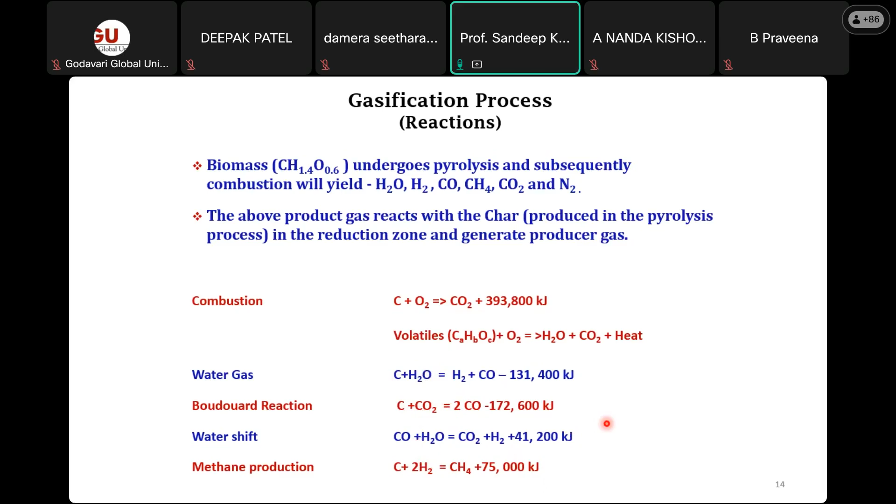So now let's look into a brief history, maybe 2 minutes, on where this gasification process or system came into picture.

The story starts from the Second World War, when the Allied forces made a strategic decision that they will cut down the supply of petroleum fuel to Europe. By that time, German forces or the Nazis had captured almost the whole of Europe, and Europe is a place which doesn't have much liquid petroleum availability. There is a lot of coal in Europe, and Germany itself has a lot of coal mines, but liquid petroleum availability is very poor in Europe.

So they were majorly dependent on imports, especially from the Gulf countries. Since they were at war with the UK and US, the Allied forces made a strategic decision that no fuel would be supplied to Europe so that military vehicles wouldn't get any fuel to run.

But there were two scientists called Fischer and Tropsch who came up with a very nice catalytic conversion process, or you can say a polymerization process, where carbon monoxide and hydrogen polymerize to give long chain hydrocarbons. So carbon gets rid of oxygen and reacts with hydrogen to make a long chain. By controlling the temperature and the type of catalyst, you can get anything from C2 molecules to C20, from simple ethane and butane up to wax, from carbon monoxide and hydrogen.

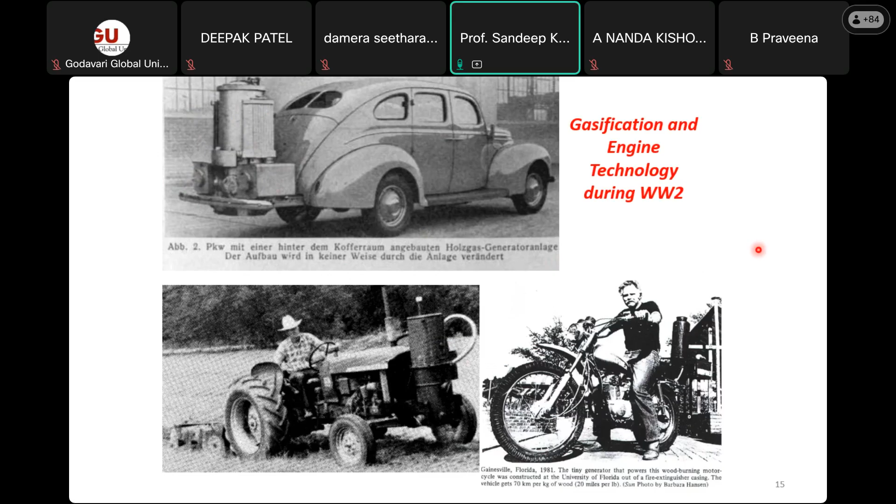More than 1 million vehicles were retrofitted with these gasifiers. They were quite popular at that time. But when the Second World War got over, cheap supply of petrol and diesel became available, and suddenly this technology just died out. It got revived again in the 80s and 90s as a renewable source of energy.

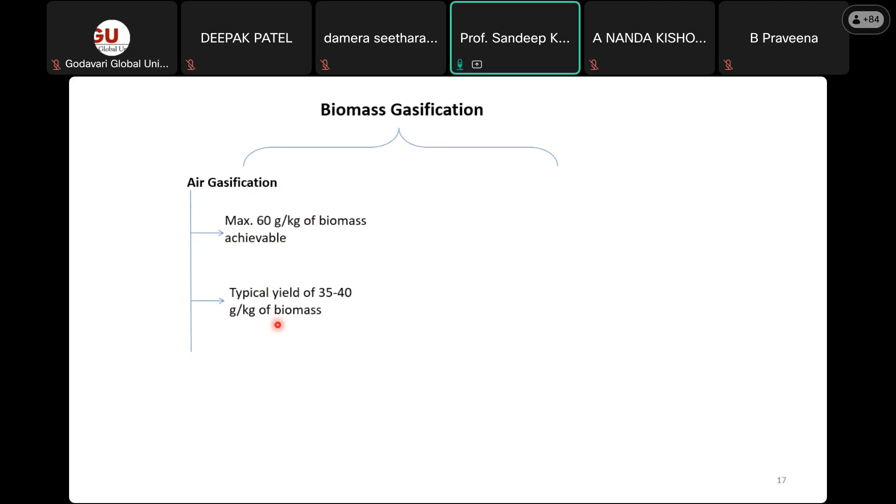And that too, the gas is diluted by nitrogen, because we are using air which has almost 79% nitrogen, which doesn't participate in any of these reactions and comes out as an inert gas occupying a lot of volume—around 45 to 50%. This leaves hydrogen as the desired product with only a small volume of around 20%, with a product yield of around 35 to 40 grams.

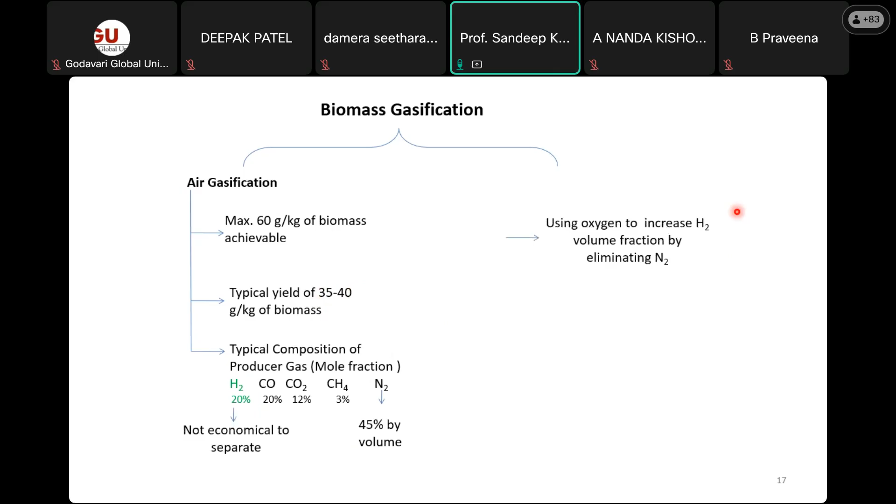So there comes the limitation, which can be overcome when we look into oxy-steam gasification, where oxygen can be used to increase hydrogen volume fraction by eliminating nitrogen.

So it will eliminate nitrogen, and then we can use steam, which acts as a gasifying agent. We can enhance hydrogen yield by using carbon and carbon monoxide through the water gas reaction and water shift reaction. What happens here is basically it eliminates the limit of 60 grams of hydrogen that is present in the biomass. We can induce hydrogen through the steam, and both things together we can club to get the oxy-steam gasification process.

So the role of steam in hydrogen production is, even in the pyrolysis zone, the steam reacts with the volatiles to give hydrogen through steam reforming, and the water gas reaction, where carbon reacts with H2O to give us hydrogen, and also carbon monoxide reacts with H2O to give us hydrogen. So basically it is the carbon source which reduces H2O to give us hydrogen, and technically part of the hydrogen that we get is actually coming from this water or the steam.

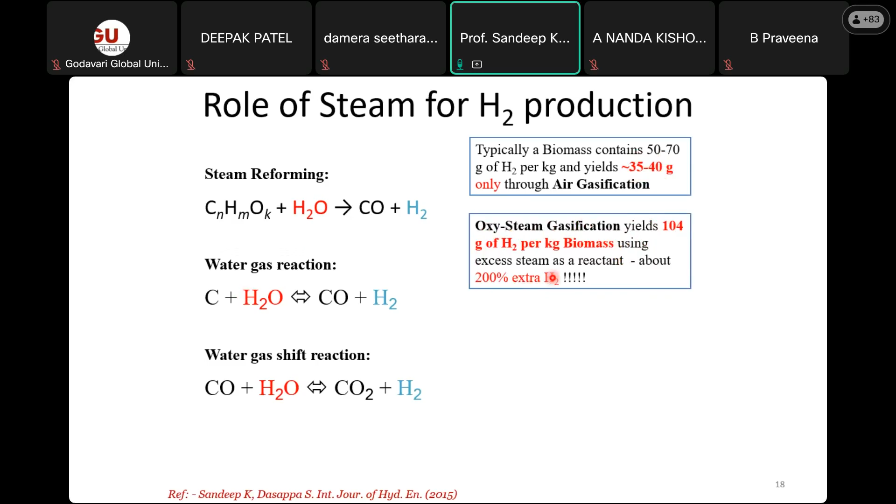So as we saw, typically biomass which contains 50 to 70 grams gives only around 35 to 40 grams. But typically we get more than 100 grams of hydrogen through oxy-steam gasification, which is more than 200% extra hydrogen that we can get from the process.

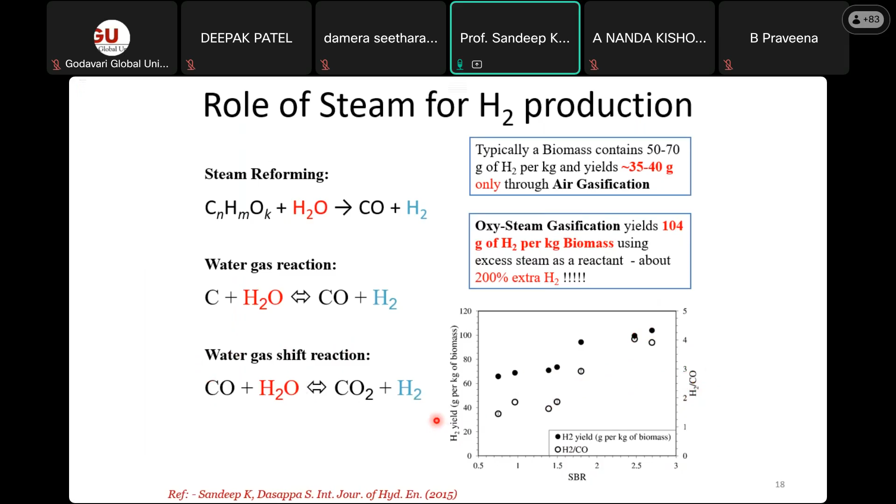So as you can see, when we increase the oxy-steam gasification steam to biomass ratio from 0.75 to 2.7, we actually get around more than 66 to 104 grams of hydrogen.

So there comes also the role of waste heat or solar thermal systems, where we can see that typically in oxy-steam gasification, biomass input energy is 75%. We require oxygen, so we need to use an air separator, which consumes energy, typically 5% of the input energy. And the residue, around 20% of the input energy, is actually for the steam, which we need at a temperature of around 400 degrees centigrade or so.

So there comes the beauty that with just around 25% of extra energy input in terms of steam and oxygen separation from air, we are actually able to more than double the amount of hydrogen that we are getting.

And also another fact is that if we are able to generate saturated steam at 100 degrees, 80% of the enthalpy requirement is met. Meaning if we have any small waste heat source, or if we can use solar thermal systems which can give us low temperature steam, we can still fulfill the major requirement of the energy for steam generation.

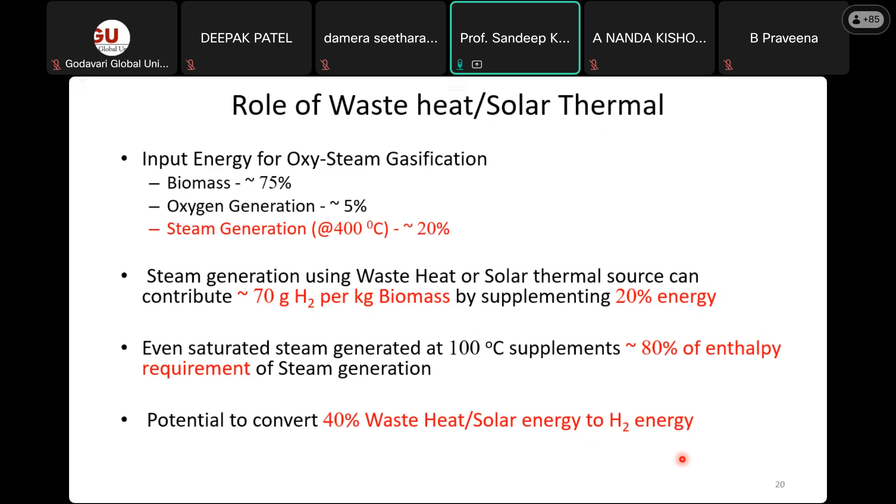So we are also working on a particular project where we are feeding the biomass waste into the system and using the gas for running an IC engine, and the IC engine generates waste heat. That waste heat is used to generate steam, which goes into the reactor, and also part of the gas we are using for upgradation and then separating to get more hydrogen into the system.

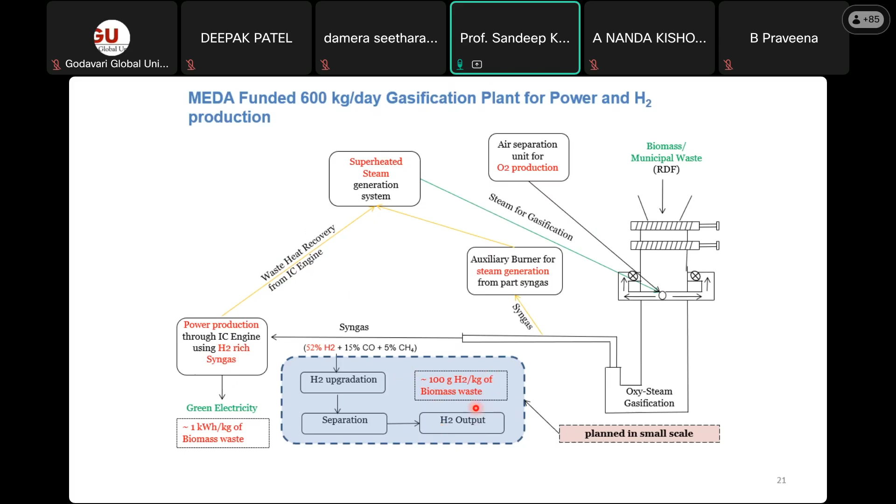So when we look into the feedstock, what type of feedstock can go into the gasification system, as we said earlier, the thermochemical system can take any dry biomass, only the moisture content should be low, typically less than 20%. We can use any type of biomass.

Whether it is coconut shell, tree branches, agro residue made pellets, chicken litter which is also organic and dry in nature, dry flowers, or wheat or paddy straw, anything can be used as fuel for the same sort of gasifier design. We don't need to do much modification. Only based on some parameters do we need to change the process parameters, but the reactor remains the same. It is very agnostic in nature.

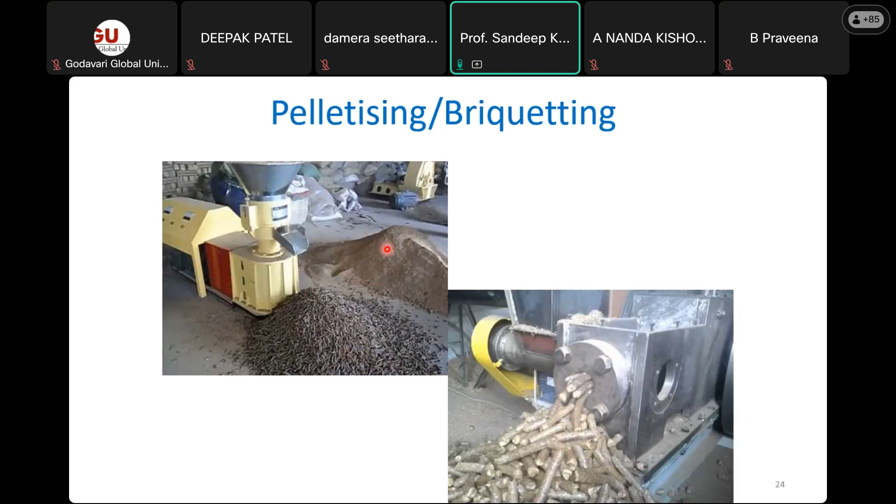One requirement is that we need to make pellets, because we need to give some porosity for the flow of gases and air through it, and also to supply radiative heat to the biomass particle. So whatever powdery biomass we have can be made into pellets using a pelletizing system.

Another sort of waste which we can use in gasification is refuse derived fuel. It may not actually come from a biomass source, but could be even plastic, paper, cardboard and such things, which can be used as a fuel that we typically call refuse derived fuel, coming from municipal waste.

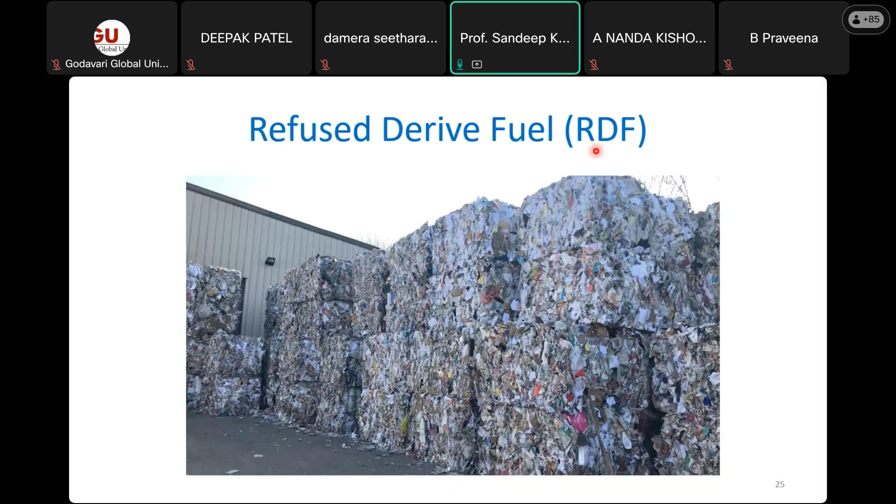When we look into the role of plastics, the plastics give more hydrogen. Plastic contains 15% hydrogen compared to 5 to 7% in biomass. We have done lab experiments, and we got more hydrogen when we increased the plastic content, going up to 25%. The cold gas efficiency also increased, as well as the calorific value of the gas, because it was getting enriched with hydrogen more and more. So adding this type of waste, waste plastic, enhances the performance of the gasifier and the quality and calorific value of the gas.

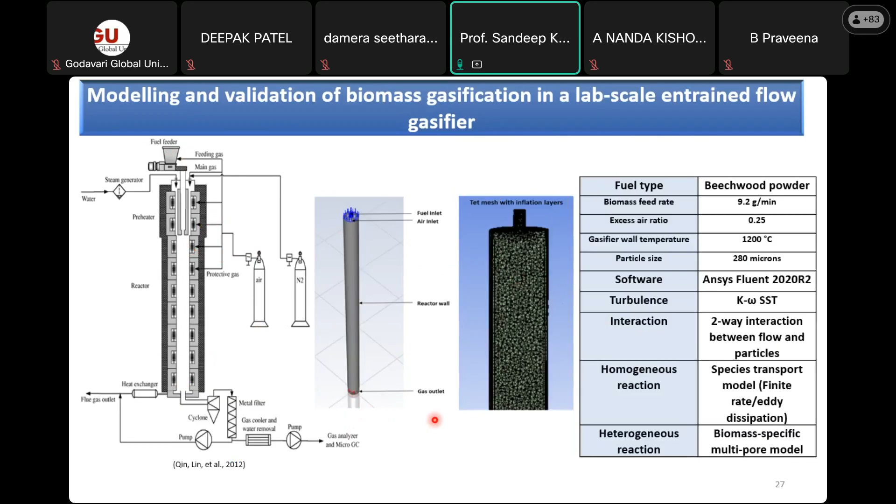Another sort of work we have been doing is on the entrained flow gasifier, which can take powdery biomass. The process remains the same, but the capacity throughput is quite high, and here we can use plastic up to 75%. That is the benefit of the work we have been doing with Monash University in Australia, with experiments here that I will not go into in detail.

Another application of the biomass gasification process we have developed on our IIT Bombay campus is decentralized waste management. We are doing a campus waste management project funded by the Alumni Association, and we have good funding for that. We are targeting garden waste, collecting around 500 tons per year. This is nothing but dry leaves, branches, dry flowers and such, which all of you will have on your college campuses too. It has roughly 70% organic material; the rest 30% is dust and soil, because when we collect, the soil is also collected together.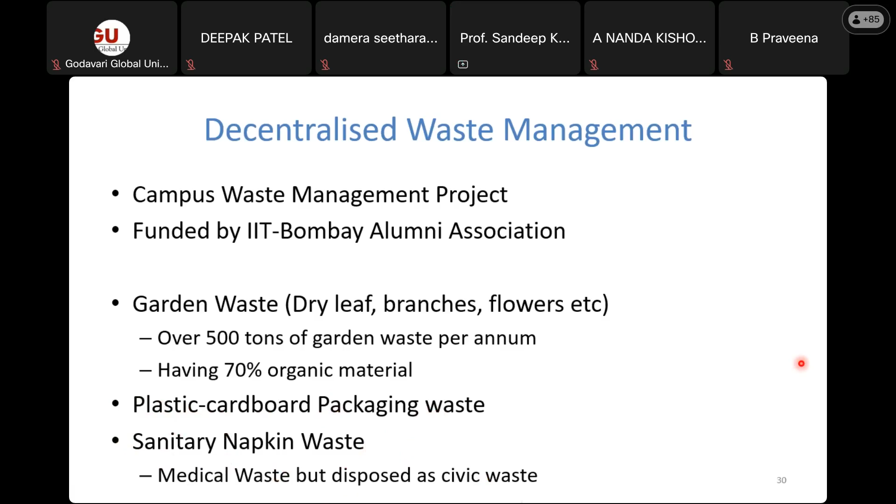But out of that, we also get plastic, cardboard and packaging waste, which is nowadays quite huge. After the COVID era, online purchases have increased, and so has plastic and cardboard packaging waste. Another type of waste we have been handling is sanitary napkin waste, which is technically medical waste but is disposed of as civic waste, and has very high moisture content, 80 to 90%. Still, in a small fraction, we are able to gasify it along with the rest of the biomass waste. So this is what we have been doing.

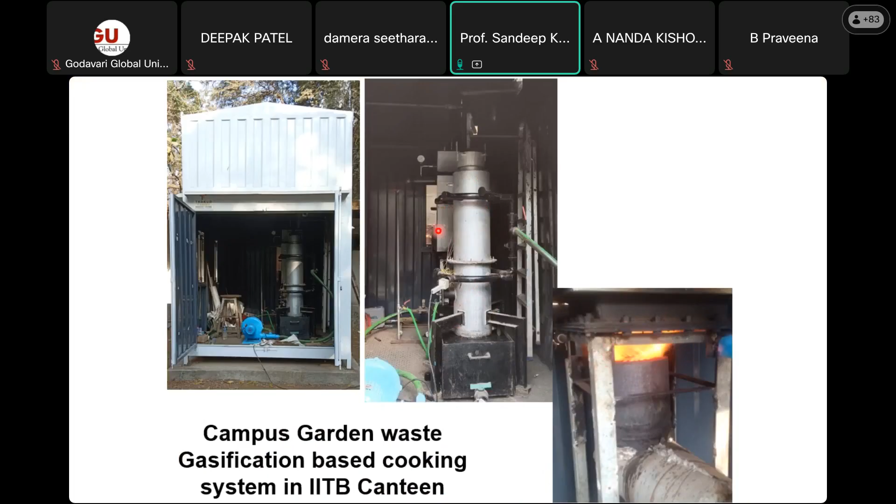This is the garden waste, and then we make pellets, which are fed into this gasifier. At the back you will see a steam boiler fed with this burner. The gasifier generates gas which is burned in this specially designed burner—very low emission and high efficiency, high temperature—which generates steam. That steam then goes into the steam cooking system inside the kitchen, where rice and dal are boiled, milk is boiled, and chana, rajma, and similar items requiring boiling are cooked.

We are also shortly putting up an idli maker where idli will be cooked using this steam. Here we convert around 1.5 to 2 tons of garden waste. Because of fire hazard, we generally have to send it outside and pay the BMC municipality around 50 lakh rupees, since it's organic waste and we have to pay a fine to give it to them. But after incorporating this system, we have the opportunity to save around 90 tons of LPG and 300 tons of CO2 emissions annually.

Right now in this particular system we are saving around 10 kgs of LPG daily. We are putting a bigger system in a student hostel of 500 students capacity, starting end of December. After that, two more hostels we will target, where together we will have 90 tons of LPG savings annually. This model can be implemented in any big education institute with student messes, canteens, and similar high waste generation.

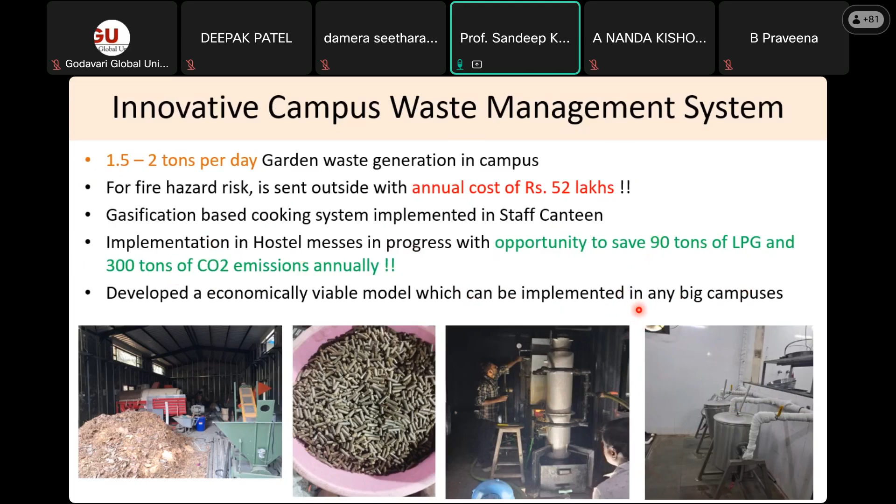So currently we are saving around 10 kgs of LPG per day, and we will be implementing it for a 500 student hostel next month.

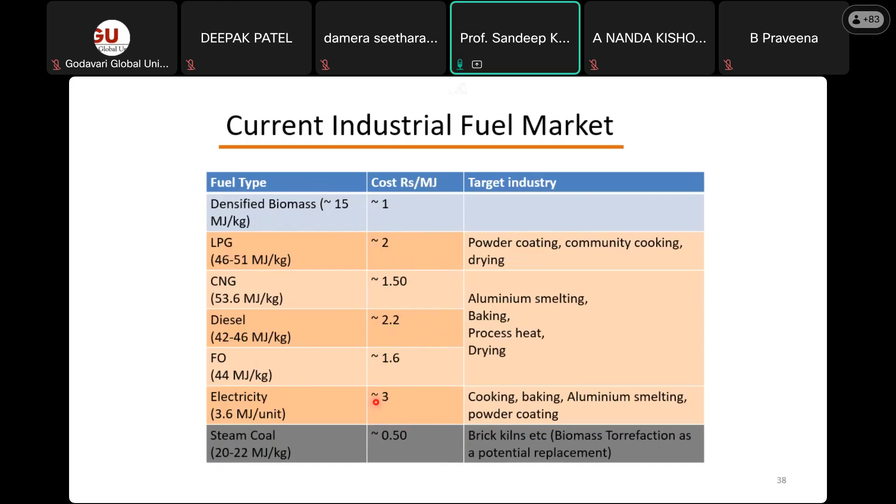Another application that gasifiers have is in thermal applications. When we look at biomass, it has a cost of less than 1 rupee. Compared with LPG, the cost is around 2 rupees per megajoule. For CNG it's around 1.5 rupees per megajoule. For diesel it's more than 2 rupees, and for furnace oil also more than 1.6 rupees. Electricity is the highest, around 3 rupees. Only coal is cheaper than biomass. But wherever these applications—LPG, CNG, diesel, furnace oil, or electricity—are used, we can convert them into a biomass-based system using our specialized burners, which are very low emission with quite high temperature. We get more than 1100 degrees, compared to a conventional burner.

Hello, does anyone have any query? Okay. Yeah, somebody was saying something.

Yes sir, can we know about the design of that gasifier, sir? The details of that gasifier—what was shown in the previous slide? Yes, this one. Yes sir, yes sir, that one. So this particular one is actually a 10 kg per hour unit. Not this one, sir, not that one—the next one, sir, next one I think. Next slide, sir. No.

This one, sir, this burner. Yes, sir, this burner, yes, sir.

This is actually just a burner, which is a premix burner. This is our patented technology. One of the PhD students had worked on this. We have created a very low emission and high efficiency burner. Its efficiency is as good as LPG burners, even though this is a low calorific value fuel. It also takes care of all the particulate matter and ash which comes from the gasifier. If anyone is interested in this gasification technology, we can work together. This design is patented, so we can't disclose the design right now, but if you want this installation in your campus for research or application purposes, we will be happy to collaborate and work together on this aspect.

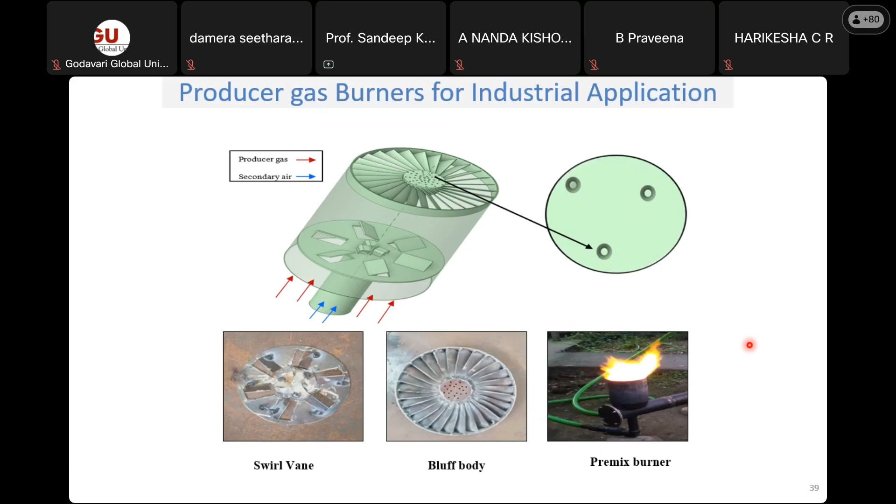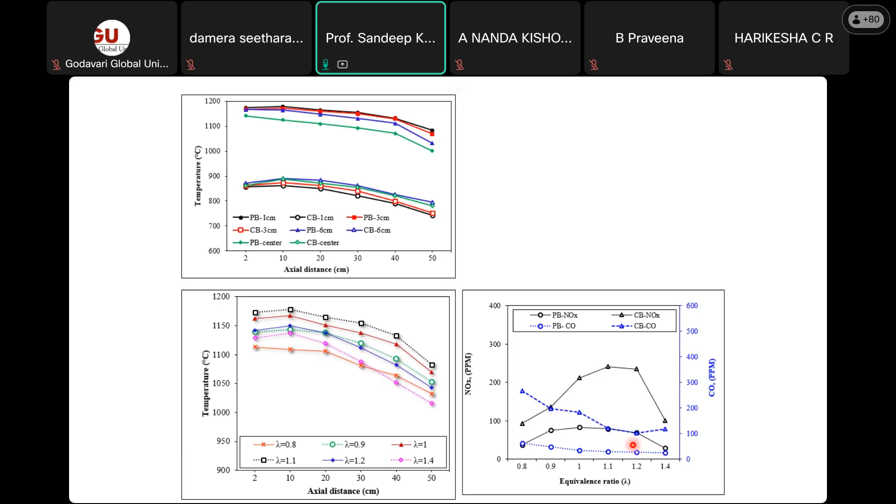The emissions are quite low. The conventional burner temperature is less than 900, while we have gone to around 1150 degrees or so. The emissions of conventional burners are high, whereas our emissions in the new burners are quite low, both NOx and CO. We have also worked on this flameless combustion burner. In the flameless combustion burner, the flame is not even visible outside, it stays inside the burner. This is very useful in many industrial applications where uniform heating is required, and the emission is very, very low, even lower than normal LPG or natural gas burners.

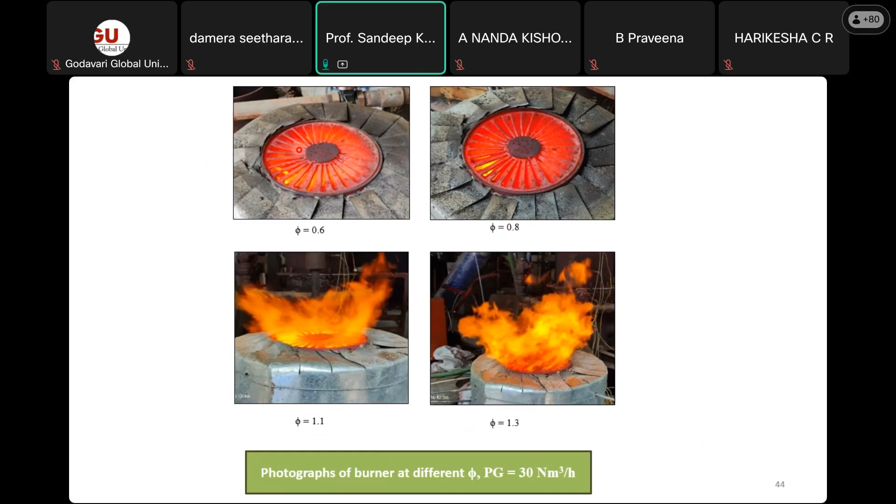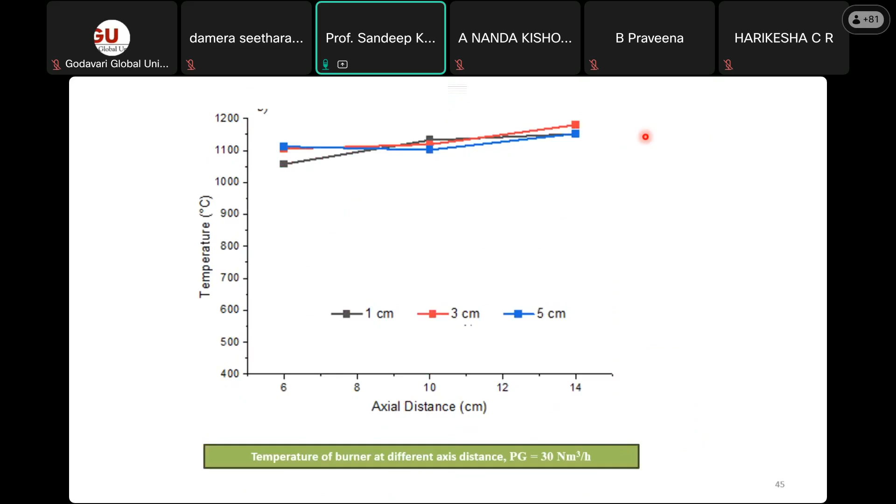You can see this is a typical normal burner application, but in the flameless version, the entire combustion zone stays within the burner. Here the temperature is very uniform. Across the axial distance and different heights, the temperature is 1050 to 1150 degrees, very uniform, which is the requirement for many industries for thermal applications. The emissions are much lower than CPCB norms, so it's very well accepted in the market.

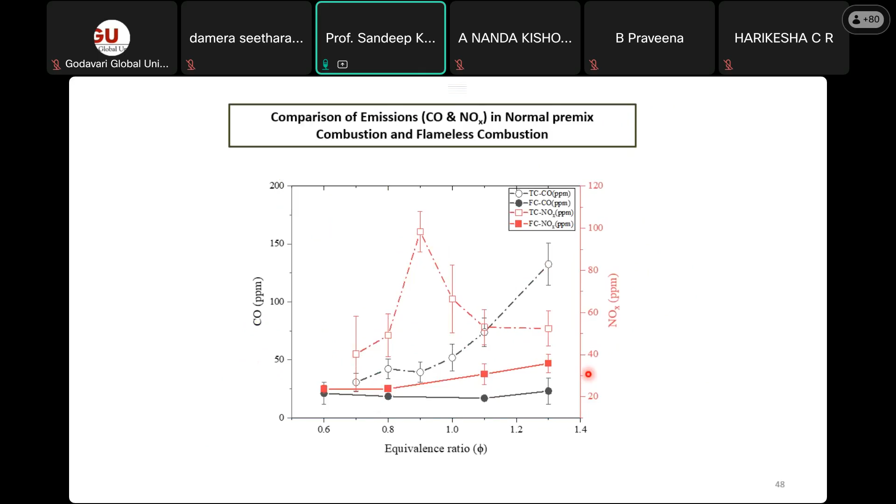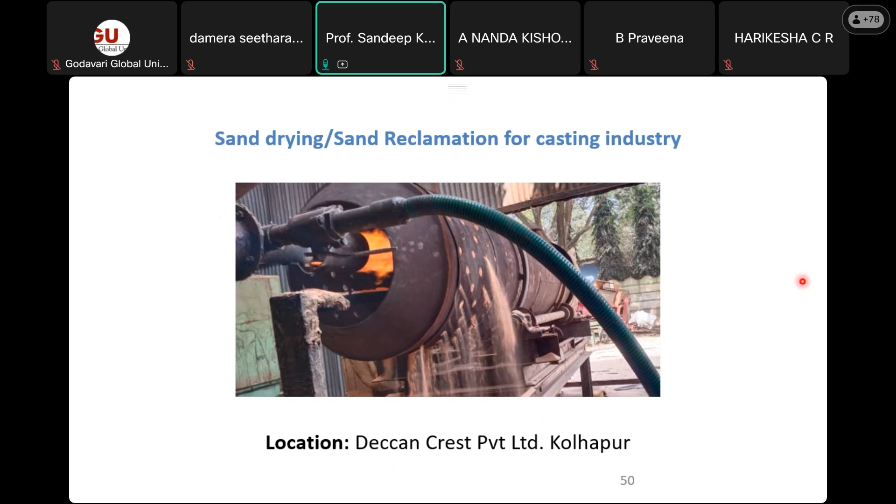This is an application in industry for sand drying, implemented in the Kolhapur sand industry, where we replaced the diesel they were using with this gasifier system, which they have been using for the past 2 years. We are now designing a bigger system for them for sand reclamation, which requires a temperature of more than 650 or 700 degrees. These are some of the thermal applications in industries that can be fulfilled by this green fuel biomass using gasification technology.

So here I would end my presentation. We are at 8:30 only, so we still have a lot of time. If anyone wants to have any discussion or query, we can take that now. The session is open for Q&A now, so I request participants to ask if they have any questions.